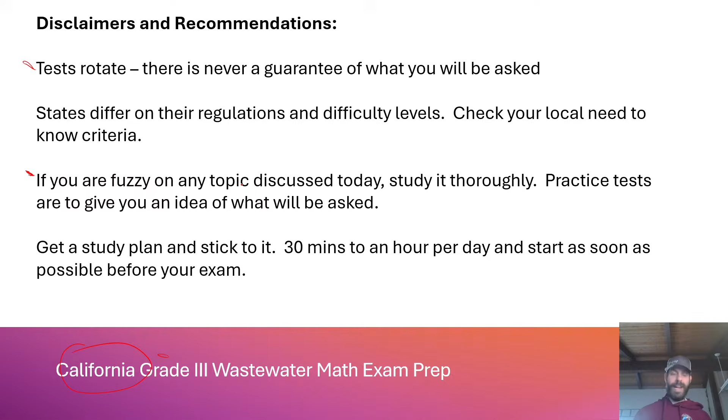So let's get into it. True or false: when operating two basins in series, that means they run parallel to each other. True or false? I'll give you a second. This is false. Series and parallel are opposite. Series means I have a basin here, and then another basin here, this one first, this one second. Very good, Donnie, false, absolutely. And then parallel is, here's my flow. Here's a basin, here's a basin. So this is parallel, okay?

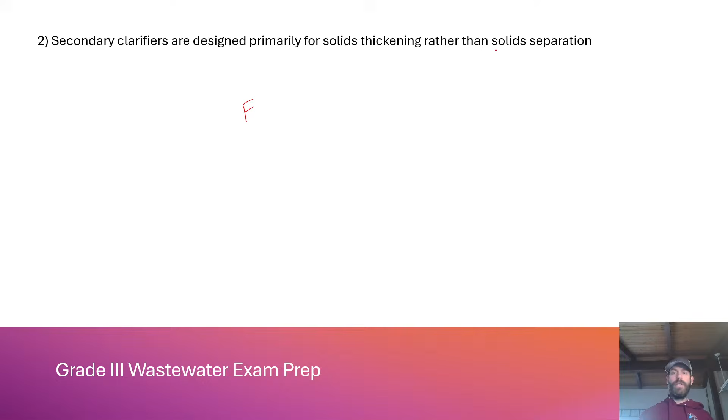Next one. Secondary clarifiers are designed primarily for solids thickening rather than solid separation. True or false? Are secondary clarifiers there to thicken solids, or are they there to get the solids to separate? This is false. They're for solid separation, not thickening. All right, Donnie got that one. By the way, if you were in my grades 1 and 2, I couldn't see the chat box because of some weird thing that happened with my pen tablet right before I launched the stream. I was able to fix that, so I can actually see you guys chatting in real time.

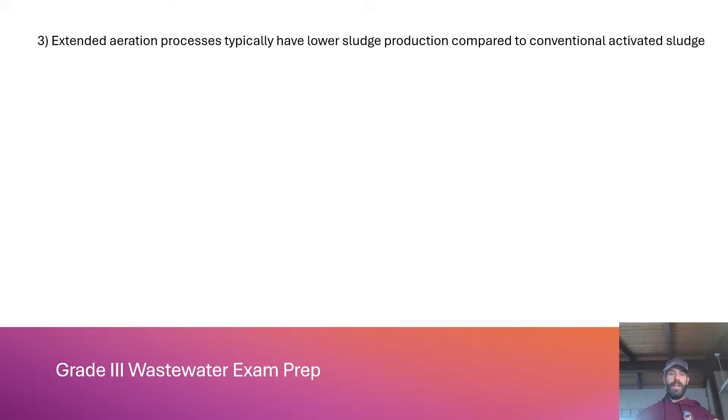This is great. Number 3: extended aeration processes typically have lower sludge production compared to conventional activated sludge. Do extended aeration processes produce more sludge or lower sludge than conventional activated sludge? This would be true. It's way more stable. You should look at the different phases of activated sludge and microbial growth. It's just stable, they're just not multiplying as much. And actually in extended aeration, they're kind of cannibalizing each other a little bit.

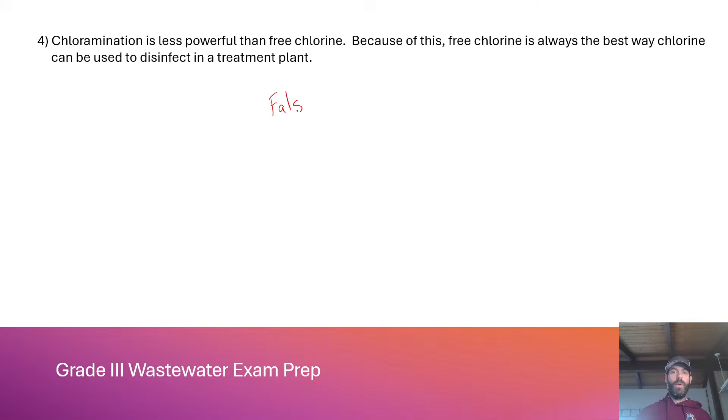Number 4: chloramination is less powerful than free chlorine. Because of this, free chlorine is always the best way chlorine can be used to disinfect in a treatment plant. True or false? This is false. Watch out for these 'always' words, the always-never trap. I'm always suspect of something when I see the word always or never. Chloramination has its place, even though it may not be nuking the bacteria. There's disinfection byproducts you have to think about with free chlorine. With chloramination, you don't have to worry about those as much. And the other thing chloramines do is hold their residual longer than free chlorine. So if it's a hot, windy day and you've got a lot of detention time in your contact chamber, chloramines are actually pretty useful.

Number 5: detecting fecal coliform confirms pathogens are present. When you do a test and detect fecal coliform, does that confirm the pathogens are present? True or false? This is false.

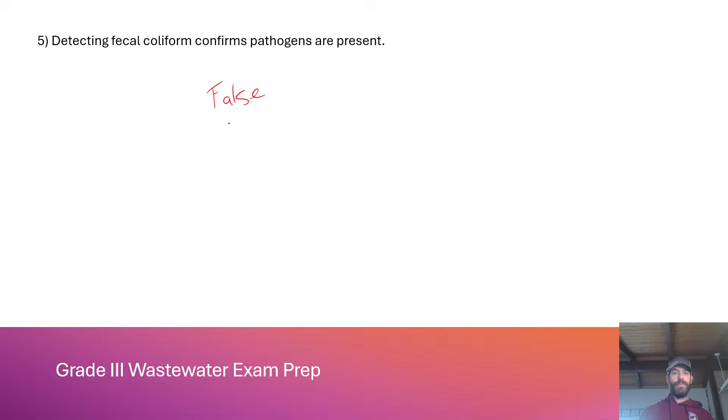Fecal coliform is still an indicator organism. It has not confirmed anything. It's just confirmed that there's fecal contamination, not that pathogens are present. This is a tricky one. I actually wrung my hands about this one when I ran into it on one of my tests, and I went and looked it up afterwards. It really hung me up when I ran into this question because I was like, oh wait a second. So no, it's still an indicator.

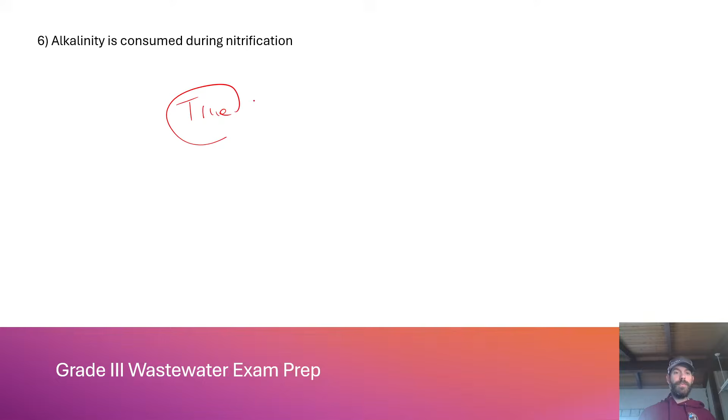Number 6, alkalinity is consumed during nitrification. True. Yep, absolutely. There's a few different things going on there, but just know that alkalinity is consumed. Alkalinity is put back in during denitrification at half the rate, half the rate that it's consumed during nitrification.

Number 7, it's a number that escapes me. I want to say it's 7.14 for some reason, but I don't think that's right. I would have to reference that. It's like 7 point something pounds per pound of ammonia converted, and then it's half of it. It's like 3 point something pounds of alkalinity is returned when you denitrify. So look that one up. That one never sticks with me because it's not something I need to hang on to in my mind for work or anything.

Complete mix and extended aeration activated sludge variations have almost the exact same F to M ratio. This is false.

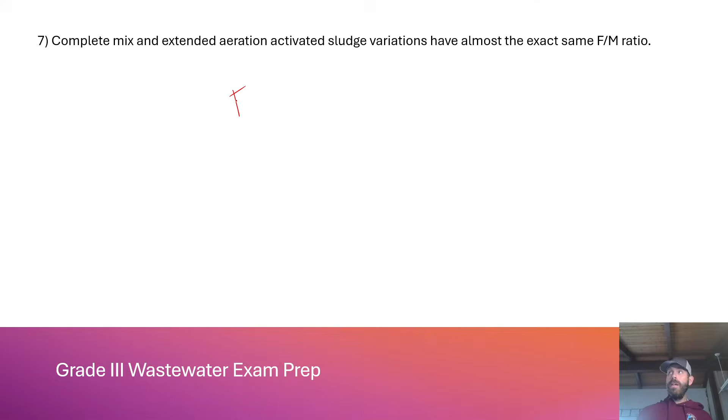Complete mix is going to be a higher F to M ratio. Extended aeration can get really, really low. Complete mix is going to be, you can have a 0.2 to a 0.4, 0.3. I think it can go all the way to a 0.5, which seems really, really high, but extended aeration is going to be really, really low. So this is false.

Number 8, aerobic digester supernatant is very clear, but still requires treatment prior to disinfection. This is true.

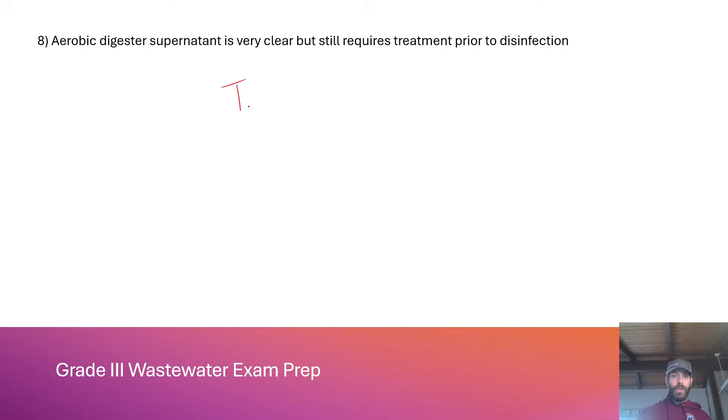It's still loaded with BOD and nitrogen, really. Lots of nitrogen typically in an aerobic digester supernatant. It goes without saying for anaerobic digester supernatant, which is pretty turbid typically. Aerobic digester supernatant, if you're doing it right, comes out pretty clear, but it's still, you got to run it through the process. At my plant, it goes back to the headworks. I've seen other plants where it just goes straight to aeration.

Number 9, disinfection refers to the killing of all microbes in the water. True or false? False.

Disinfection refers to the inactivation or killing of pathogens, not all the microbes. Killing of everything in the water is called sterilization. It's impractical, it's incredibly expensive. Something I experienced on my grade 5 exam, and I actually wrote a little note because they said something about how chlorine was killing all the pathogens.

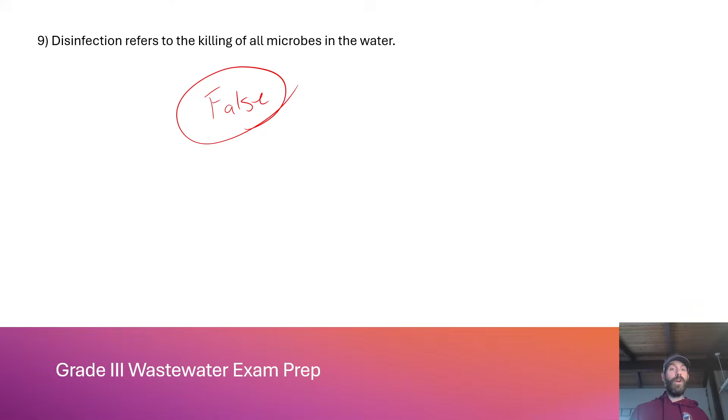That was actually the correct answer because the other answers they had were ridiculous and weren't right. But I wrote them a little note and said, hey, it's technically inactivation of viruses. You kill bacteria with the chlorine, but when you're hitting viruses, they're technically not alive or dead before they inhabit the host. They're interesting creatures before they inhabit the host. What you do is deactivate their ability to reproduce and make you sick. They're still there. So it's a nuance, but I think it's really important to call that out and make sure you understand that disinfection is the killing of some pathogens, but also the inactivation, remember that word, of pathogens.

Number 10, the primary purpose of sludge thickeners is to optimize digester performance. The primary purpose of sludge thickeners is to optimize digester performance. True. You want as thick a sludge as possible going to your digester.

That's why we use thickeners. I'm sure they have some other side reason that you would use a thickener, but your purpose in a thickener is to get as much water out of that sludge before you send it to digestion, okay?

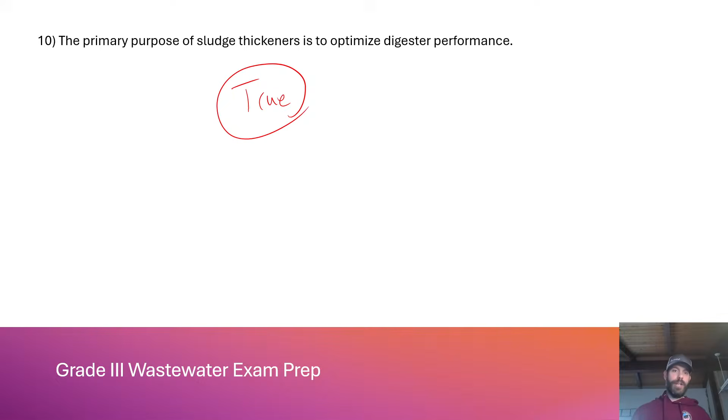Number 11, autotrophic bacteria are responsible for ammonia oxidation. Autotrophic bacteria are responsible for ammonia oxidation.

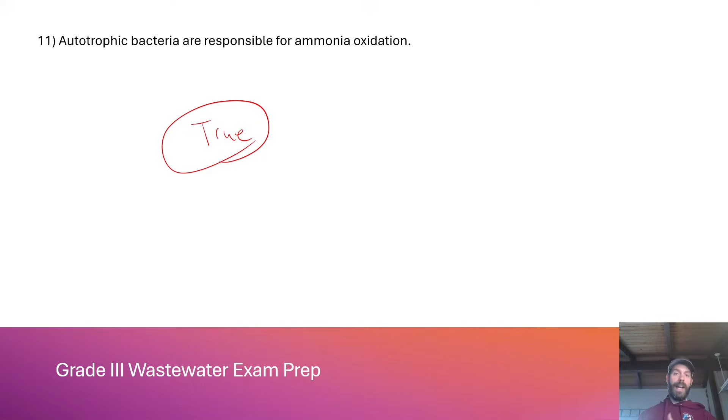This is true. Autotrophs - check out my wastewater whiteboard on nitrification and denitrification, I go into what autotrophs actually are. There's heterotrophs and autotrophs. Autotrophs use inorganic carbon as their food source and inorganic substances like ammonia.

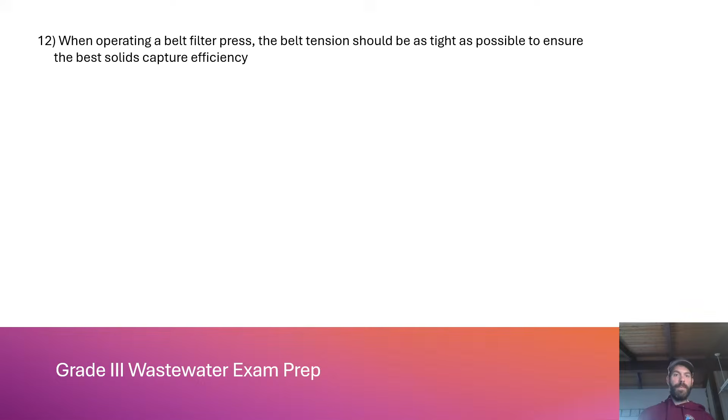Number 12: when operating a belt filter press, the belt tension should be as tight as possible to ensure the best solids capture efficiency. This is false. That's a really good way to blind your belt. You have to have tension, of course, but if it's as tight as possible, the pores stretch and they blind when the water's supposed to pass through.

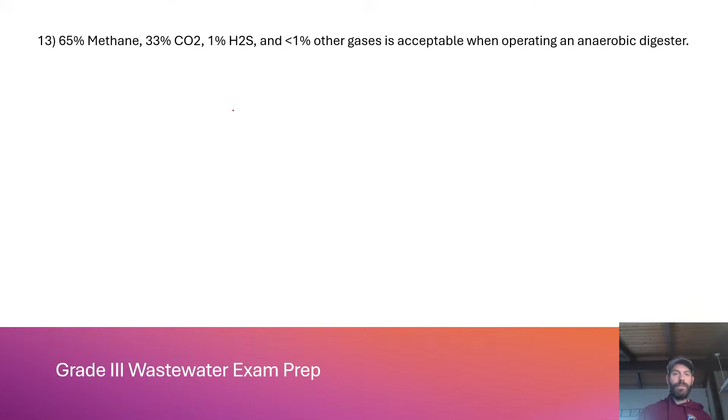13: 65% methane, 33% CO2, 1% H2S, and less than 1% other gases is acceptable when operating an anaerobic digester? This is false. So this is a common trick - the eye is trained for these two, right? 65% methane, that looks pretty good. 33% CO2, that looks pretty good. This is the trick - 1% hydrogen sulfide, no way. It's more like 200 parts per million. 1% is 10,000 parts per million. You're typically going to see less than 1% H2S and other gases. H2S is in there, but it's not 1%. That could cause a lot of problems, corrosivity, among other things. So this is false. Watch out for that.

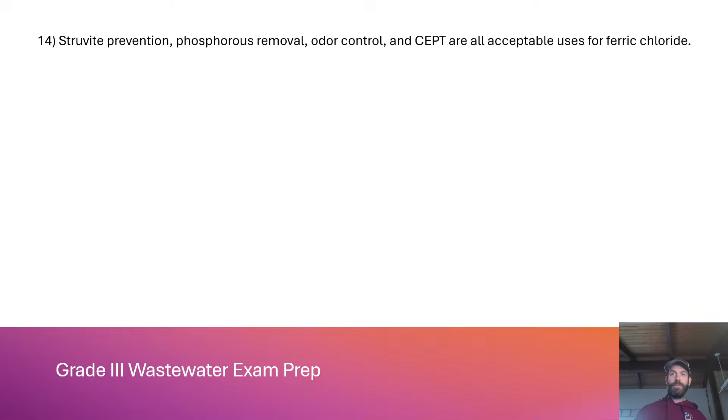Number 14: struvite prevention, phosphorus removal, odor control, and CEPT are all acceptable uses for ferric chloride. This is true. Yep, you should really know all the uses for ferric. I got hammered on - I can't tell you all the things because obviously I can't give away actual test questions that I experienced, and it's been years so it's fuzzy at this point, but I just remember getting a lot of questions about ferric chloride on my grade 3, so just be aware.

Number 15: aluminum sulfate adds alkalinity and raises the pH of the water. This is false. Nope, absolute opposite - it eats up alkalinity and lowers the pH. It's acidic. Pretty common thing to run into at this level is knowing that it lowers the pH.

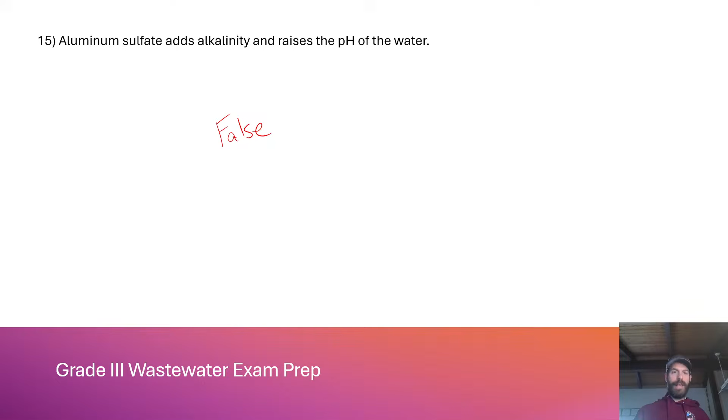Number 16: when nitrifying on a trickling filter, it's important to keep the organic loading at around 20 pounds per day per 1,000 cubic feet. This is false - less than 10 pounds. Okay, you want less food. When you start getting into these nitrification questions, just remember to err on the side of less food. 20 pounds per day per 1,000 cubic feet is more like a standard rate. A nitrifying trickling filter would be less than 10 pounds per day per 1,000 cubic feet. These are the types of trickling filter and pond questions you're going to start getting, not about sloughing and stuff - that's a grade 1 and 2 thing.

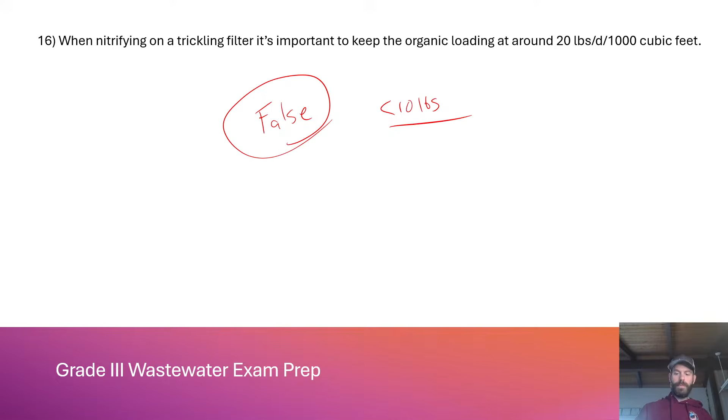Number 17: increasing the MCRT and DO in aeration is a common way to oxidize ammonia. True. You're going to want to get those autotrophs we talked about earlier - they're slow growers. You need to increase your MCRT or SRT if that's what you're using in your plant, or sludge age could be used. You want the higher the better, and you need more DO, more dissolved oxygen, typically around 2 to 4 milligrams per liter. I've seen higher, but 2 is like the floor. I've never seen anybody recommend less than a 2 milligram per liter dissolved oxygen concentration for nitrification.

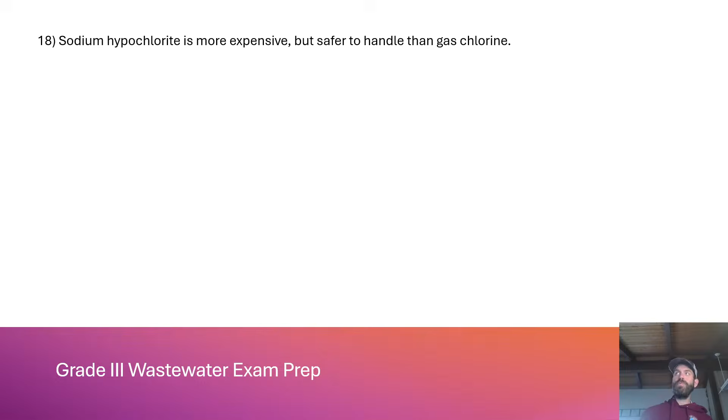Number 18: sodium hypochlorite is more expensive, but safer to handle than gas chlorine. This is true. Instead of shipping gas in big containers, it's liquid - it's 80%, or mostly water. You're just shipping water around. However, you don't have all the dangers of gas chlorine.

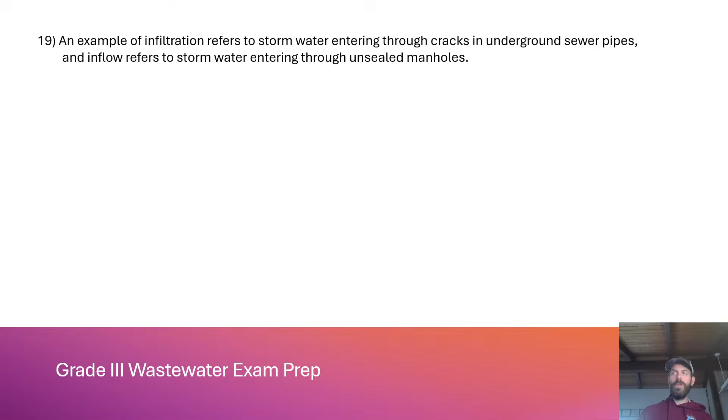An example of infiltration refers to stormwater entering through cracks in underground sewer pipes, and inflow refers to stormwater entering through unsealed manholes. True or false? True. Make sure you know the ins and outs of I&I. I haven't studied a ton of I&I, I don't have to deal with it. I&I is a pretty simple concept, but they can come up with some tricky questions about it. It's kind of surprising when you're taking your test - it's like, geez, where do they come up with this? It's typically nothing I have to really worry about, but just understand I&I and what it does to a plant.

When performing a permit required confined space entry, the 3 roles that need to be filled are the entrant, attendant, and entry supervisor. True or false?

This is true. Those are the 3 roles.

Had a fun little debate over text message this morning, and if any of you are on LinkedIn with me, you might have seen me comment on somebody's thing. So here's the deal, 3 roles that need to be filled.

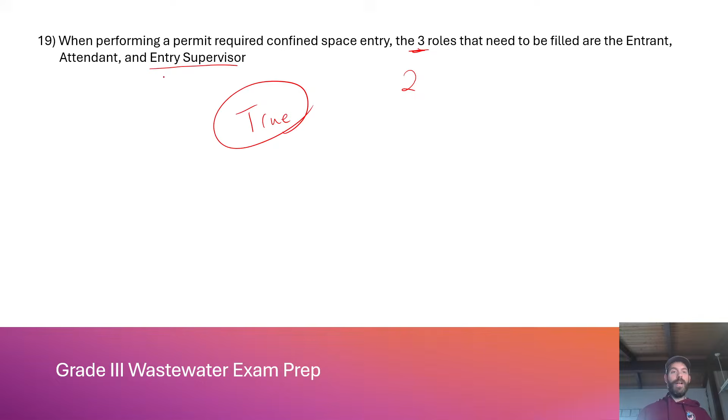If you get a question on your exam that says what's the minimum number of people required, is it 3? It's 2. And here's why: the entry supervisor can also be the attendant, and can also be the entrant. So really the minimum, if they say minimum number of people, even though I know there's 3 roles to be filled, I would say 2 because that is OSHA regulations. That's what OSHA says. Best practices, 3 or more, because you can get into some sketchy stuff with confined space, permit required confined spaces, but this is the bare minimum amount of people, since the entry supervisor can also be the attendant or the entrant at the same time.

Just something to be aware of. So that's a true false. Not too bad, pretty easy.

Now we're gonna jump into the multiple choice, which is gonna ratchet up the difficulty here. Remember with true false, if you don't know it, you have a 50-50 shot. Multiple choice, it's a little bit more, they're gonna screw with your head a little bit more on this one. So I've tried my best to build it in that way, but not lose everybody while I'm doing this. So let's get into the multiple choice.

And if you have any questions, I can see the chat. Donnie seems to be going right on along with me, which I appreciate. If you wanna throw your answers in there, be my guest.

What is nitrification? A, the biological reduction of ammonia to nitrite to nitrate. B, the biological oxidation of ammonia to nitrite to nitrate. C, the biological oxidation of ammonia to nitrate to nitrite. Or D, the biological reduction of ammonia to nitrate to nitrite. Which one of those?

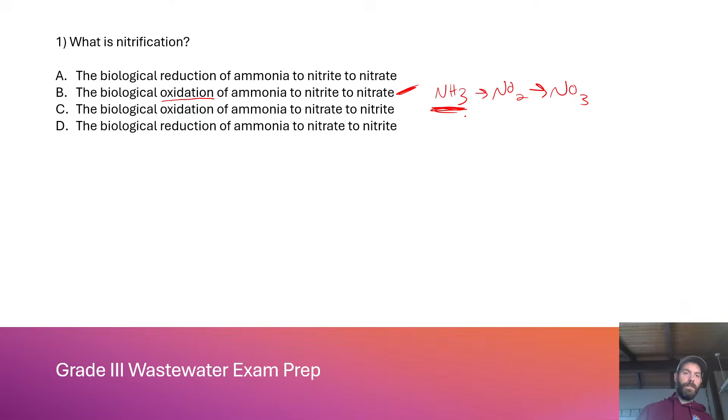Which condition is most likely to cause brown stable foam in an activated sludge system? A, low MLSS. B, filamentous bacteria such as nocardia. C, excessive RAS pumping. D, high DO levels. Which condition is most likely to cause brown stable foam in an activated sludge system?

The answer is B. There you go, nice to see you. B, filamentous bacteria, which, spoiler alert, a few people out there know this that I've been texting with. Christian, who's popped off the chat, I'm dealing with this right now in my plant. It reared its head, and I had a foam over yesterday. It was a lot of fun.

So even those of us that have been doing this a long time, especially in a plant like mine that has to run such a high MLSS and a low F to M, these guys will sneak up. We had a temperature swing, I think that had something to do with it. It was a really adventurous afternoon yesterday. We got it under control, but Nocardia is a bear. I think it's Nocardia, we're gonna do some microscopic analysis on it. But anyway, just so you're aware, filamentous bacteria.

Which process is most effective for phosphorus removal? A, a trickling filter. B, chemical precipitation with alum or ferric. C, aerobic digestion. Or D, chlorination. Most effective for phosphorus removal.

I put this in for those who are not in California. I have not ever, grades 1 through 5, gotten a phosphorus question. If I did, it was forgettable, because I don't remember ever getting a phosphorus question. But you should still know it, because you never know when they're going to pull it out on you. But yeah, B, chemical precipitation with alum or ferric chloride, of these options is the most effective for phosphorus removal.

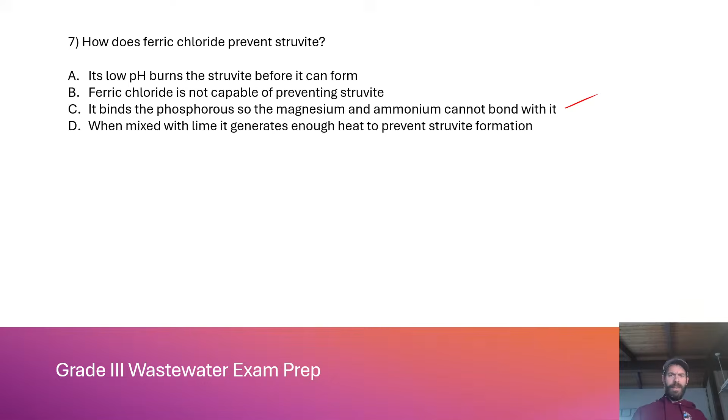So yeah, understand struvite, and understand that struvite, I think it's called phosphorus, magnesium, ammonium, or I forget the actual name of it, but those are the 3 elements you need to create struvite, which is a big problem in anaerobic digesters. Number 8, when operating a wastewater treatment plant with 2 trickling filters, you lose your primary clarifier.

How would you adjust flow to the trickling filters to ensure proper secondary treatment? A, run the filters in parallel. B, increase recirculation. C, decrease recirculation. D, run the filters in series.

So on this one, I've written it a certain way because I'm guiding you to the answer that I believe you would be asked for, because I have run into this question or something like it. It was years and years ago, but yeah, the answer, Donnie, you were absolutely right, is D. Run the filters in series.

You lose your primary clarifier. That's the key. Okay? You have to assume if you have 2 trickling filters, they're already running in parallel. Okay? You've lost your primary. What are you going to do?

You're going to run 1 trickling filter here, and this will be your roughing filter, which acts kind of like a primary clarifier, and then you're going to move to the next one, and this will be your secondary. If it's a standard rate, it's probably now a high rate. So yeah, this is what we're looking for. You're going to want to run the filters in series.

Which of the following organisms are the primary consumers of the organic waste in the wastewater? A, bacteria. B, stalked ciliates. C, rotifers. D, both B and C.

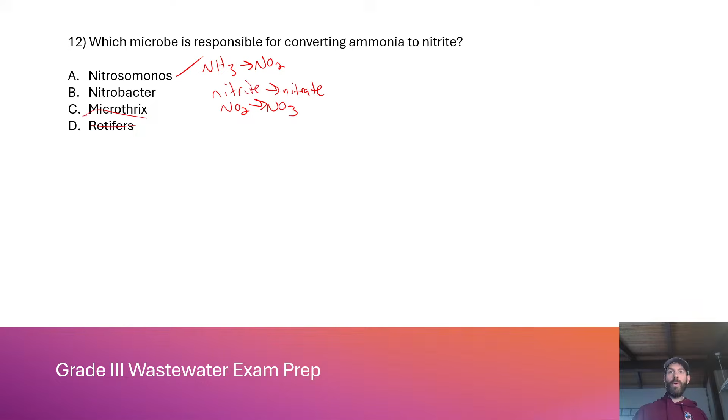I got to go watch your video again. Oh, yeah.

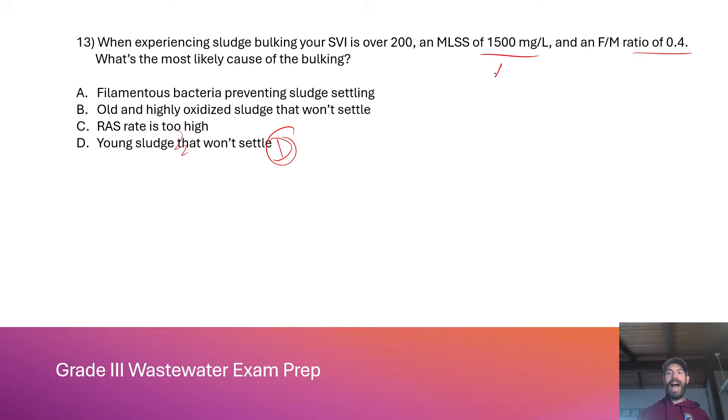This is young sludge. Where'd my pen go? There it is. D, young sludge. B, old and highly oxidized sludge that won't settle, no, not with an MLSS of 1,500 and F to M of 0.4. The older your sludge gets, the higher your MLSS goes and the lower your F to M goes. You could still have an SVI over 200, but typically old and highly oxidized sludge is going to fall like a rock. Filamentous bacteria, probably not in this scenario. Filaments like really low F to Ms, that's not low, and they like high MLSS situations, that's not high. So the best answer is young sludge that won't settle with these factors.

This is why the grade 3 gets tough, because you've got to think about it. I've seen old and highly oxidized sludge that did settle well but left pin floc behind. But that's not the scenario I'm creating here.

14. Why would a secondary clarifier sludge blanket float to the top of aeration? If you see this, what's going on? A, filamentous bacteria preventing sludge settling. B, denitrification in the secondary clarifier. C, too low of a sludge blanket. D, when performing an SVI calculation, your SV30 is 200 milliliters per liter. Which one of those is the best answer for why a secondary clarifier sludge blanket would float?

Donnie, absolutely. B, denitrification in the secondary clarifier. That's just what happens. To fix this, in the short term you'd probably increase your RAS to get it moving faster, but in the long term you probably need to either take a clarifier offline or waste a little bit more, or increase your DO. There's a lot of fixes for it, but DO and aeration could do it too. It's really gonna be plant specific on how you solve this. But yeah, that's what's actually happening: denitrification in the secondary clarifier, gas bubbles float the blanket.

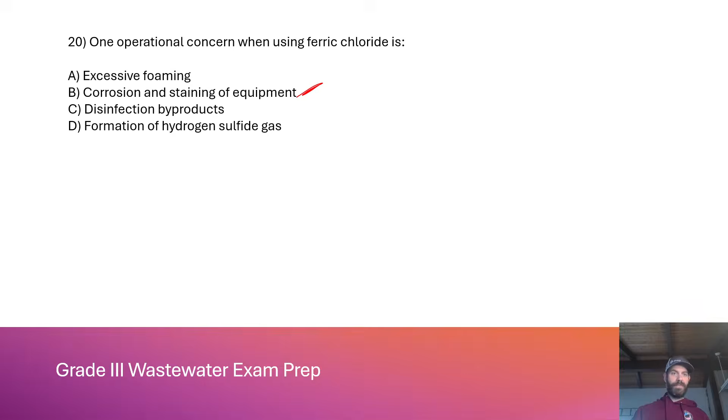21. What is one advantage of using drying beds rather than a belt filter press, BFP? What is one advantage of using drying beds rather than a belt filter press?

Dirt is microbes, okay. Chief Squeezy Poop turns everything orange. Yes, oh my God, dirt is living. I've never done that, Penguins, if that works for you, I've just never heard of that. I actually asked a few other operators, have you ever put dirt in an aeration basin?

Hey man, one thing I'll never do on this channel is tell people how to run their plant. I'll stick to the textbook stuff, but I've got an issue with foaming in my plant right now. Abby sent me material from a company with a synthetic BOD product, and they said it's better than glycerin and dog food. That made me chuckle, because I've seen people throw dog food in aeration to fix an F to M problem. I saw it at Big Bend National Park - the operator there was feast and famine, and he'd dump dog food bags into his complete mix aeration basin. Pretty interesting. Dirt is organic - organic is the O in BOD.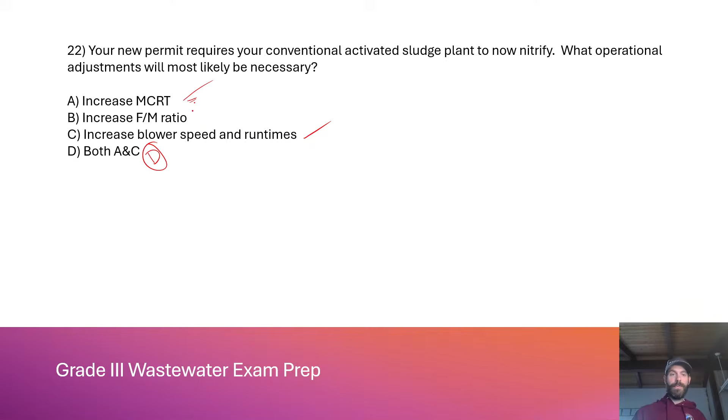The other thing you might get - this is more of a grade 4 and 5 topic, but you might see it on the 3 - is, what's a drawback of having to do this? One of those things is increased power costs because you have to run the blowers more. Also, when you increase your MCRT, you actually have to waste less over a long period of time because the sludge is thicker. You don't have to waste as much to maintain your MLSS in aeration. I'm going to dive deeper into that in my grade 4 and 5 version of this live stream, which I'm thinking will be in January. This took a lot more effort to build than I thought, and the grade 4 and 5 is involved, so I'll get back to you on timing - hoping mid-January, but we'll see.

In which of these locations is an ORP useful? A, anaerobic zone. B, anoxic zone. C, chlorine contact chamber. Or D, all of the above. ORP stands for oxidation reduction potential, and the answer is D, all of the above - you can use these everywhere. They're really cool. I've got one in my anoxic zone, one in my chlorine contact chamber, and I use one after dechlorination. What's cool about an ORP is it will tell you if you're anoxic or anaerobic. The dissolved oxygen sensor can only go so low, and if you hit zero, you could have no dissolved oxygen but still have nitrates in there.

And the ORP is going to tell you where you're at. I go into that on my nitrification, denitrification whiteboard lesson, so go back and read that. I also did a whole whiteboard on oxidation reduction potential, so you should look at that too.

When analyzing MLSS under a microscope, you notice a predominance of rotifers. What does this indicate? A, high sludge age and high MCRT. B, low sludge age and low MCRT. C, high sludge age and low MCRT. Or D, low sludge age and high MCRT. Which one would you expect if you saw a predominance of rotifers? Donnie says A, absolutely.

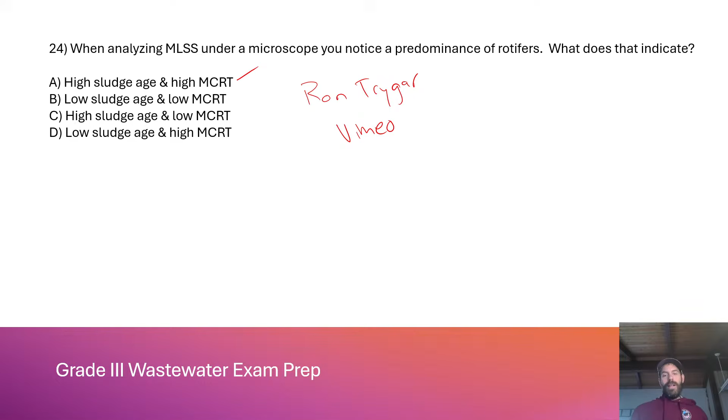If you want the gold standard of activated sludge process control when it comes to wasting and returning and all that stuff, look up this guy named Ron Trygar. I'm not even going to try to replicate what he did. He's been doing this for a long time. His videos are on Vimeo, not on YouTube. He's got like an hour and a half lecture on what happens when you increase wasting, what happens when you decrease wasting when it comes to F to M ratio, when it comes to MCRT, and these things. Check him out, really good, Ron Trygar. He's out of Gainesville, Florida.

Number 24: brown shaggy growth on an RBC indicates what? A, healthy zoogleal film. B, toxic load is killing the zoogleal film. C, algae is competing with the zoogleal film for food. Or D, organic overload. What does brown shaggy growth on an RBC indicate?

Penguins got it: A, healthy zoogleal film. That's what you want to see. If you see it go dark and slimy, that's the bad day. And if it were C, that would be green, and you definitely don't want algae. A lot of, not all, RBCs are covered because of this, so there's only so much real estate on there.

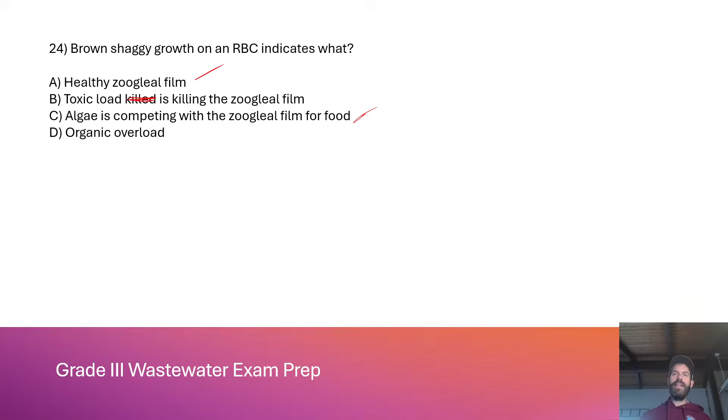White, what is white? Is that a toxic load? Forgot about white. It's like an ashy look. I remember that from something. Yeah, thanks, thank you.

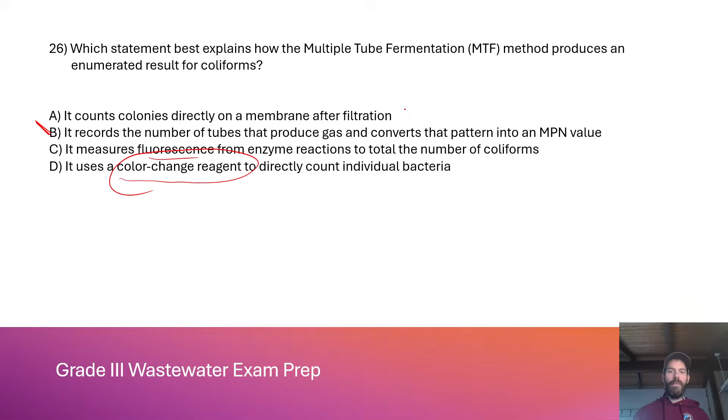That's what I was getting at. And this is the tricky part of these exams - they're going to word it so it seems like you know it because you've seen it before, but no. What we're getting at here is the Colilert or the Quanti-Tray. Be aware of that, and this is where the best answer comes in. The signal there that D was wrong, if you wanted to argue, is they count individual bacteria - no, that's MPN. Multiple tube fermentation is more of a statistical method.

This is like real-time flashcards, this is awesome. Great, I'm glad you're having fun. I'm having fun too, this is great. My boss, I told him I'm taking a long lunch of 2.5 hours to do this - I actually stretched it out. He's coming by the plant a little later and said he might pop in and photobomb my live stream. I said please do. I think everybody would love to see the guy who approved this YouTube channel, because if he hadn't given me approval, I wouldn't be standing here doing this. Anyway, I thought that was kind of funny.

Which statement is not true regarding I&I? A, I&I contributes to lower HRT, which leads to incomplete secondary treatment. B, heavier flows dilute incoming BOD, so there isn't enough food entering the plant. C, during a storm event, a trickling filter may become hydraulically overloaded. D, increased flows cause turbulence in the secondary clarifier, leading to biomass washout.

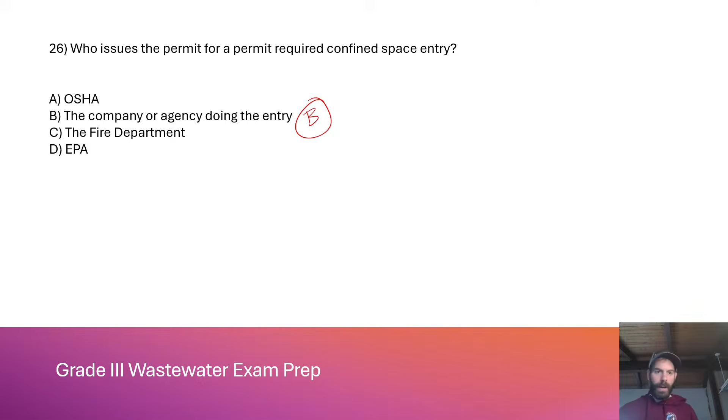Kept on record. Yep, Penguins, you're absolutely right. You file it away, you keep it on record for 1 year. 1 year is the records retention on that. I don't think you'll be asked about that. This is not an OSHA 40 class. I don't think you need to know that level.

So you might see some numbers, like number 3 right here. Don't let that throw you off. That is my corresponding number. This training I have given in person at Tri-State, so what I did corresponds with my actual answer key. That's why you see the number 3 there.

A facility has an aeration tank volume of 1 million gallons. The secondary clarifier is 750,000 gallons. The MLSS concentration is 2,800 milligrams per liter, and the effluent suspended solids is 15 milligrams per liter. The influent flow is 9 million gallons per day, and the target MCRT is 10 days. What is the WAS rate required in GPM to meet this target if the WAS concentration is 7,500 milligrams per liter?

I did a similar version of this on my wasting rate video I did a few weeks ago. If you want to go watch that, I get into wasting a little bit more in detail in that video. But let's just work this out. This is going to be a lightning round.

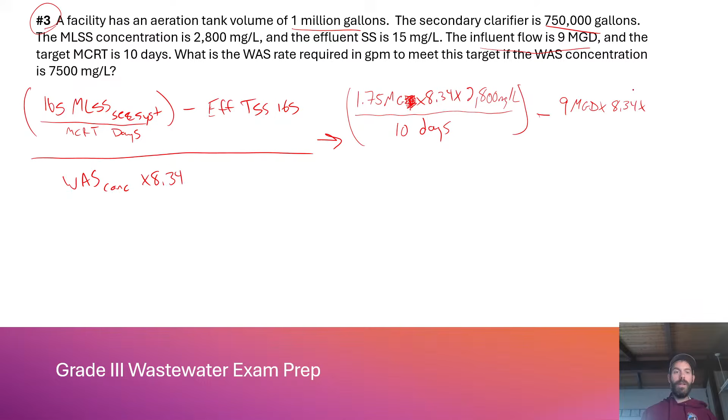Divided by 10 days, MCRT, that's my target MCRT, minus my effluent TSS. Influent flow is 9 MGD. If they don't give you the effluent flow or the plant processes, this is the only one they give you, this is what you use. 9 MGD times 8.34 pounds in a gallon of water times 15 milligrams per liter. Where did I get that one from? Right here, effluent suspended solids. Divided by WAS concentration, 7,500 milligrams per liter, times 8.34 pounds in a gallon.

Okay, bring it down here. If you work that out on your calculator... I've worked these problems out a billion times, but let me just make sure I'm not writing the wrong numbers down. 1.75 times 8.34 times 2,800 equals 40,866, divided by 10, this gives me 4,086.6. Let's just keep the decimal.

4,086.6 pounds per day. Why pounds per day? Pounds are up here, I divide it by 10 days, that gives me pounds per day. And now I can subtract from this number, which is, see, I've got MGD in here. 9 MGD times 8.34 times 15 gives me 1,125.9 pounds per day, so now my units work. Divided by 7,500. I'm going to leave this alone because this is what I like to do here, for those who like the Davidson pie, it's just the easiest way to teach this. If you do your math differently, that's fine, so long as you come up with the correct answer. That's what matters, it doesn't matter that you do it my way.

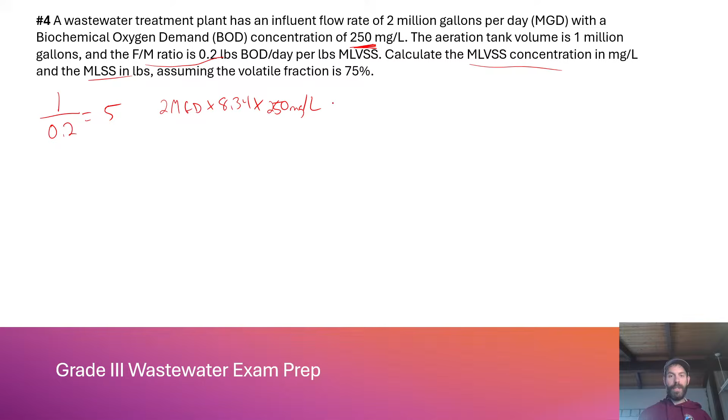I hope that helps. So when you do that math, that gives you 4,170 pounds BOD per day, okay? Now you're going to take 4,170 pounds and multiply it by 5, because we have our pounds. Now we're trying to find out our pounds MLVSS, and that should give you 20,850 pounds MLVSS.

I have seen this part of the problem show up 2 different ways. On my grade 3, I believe what we're doing right now is how you're going to see it. On my grade 4, it was the other way around, I think. I'm remembering correctly, but I have seen it. So on one version, you might have to find the pounds of MLVSS and the concentration of MLSS, or like we're doing it now, the concentration MLVSS and the pounds MLSS. Just pay attention to what they're asking you for.

Okay, so to find the MLVSS concentration, we're going to do a reverse pounds formula. That's 20,850 divided by the aeration tank volume of 1 million gallons, divided by 8.34 pounds in a gallon. So this is just a reverse pounds formula, and that gives you 2,500 milligrams per liter.

MLVSS. Okay, that's my MLVSS concentration. How did I get that? I took pounds and did a reverse pounds formula using the size in MGD, the volume in MGD of aeration, and the weight of a gallon of water.

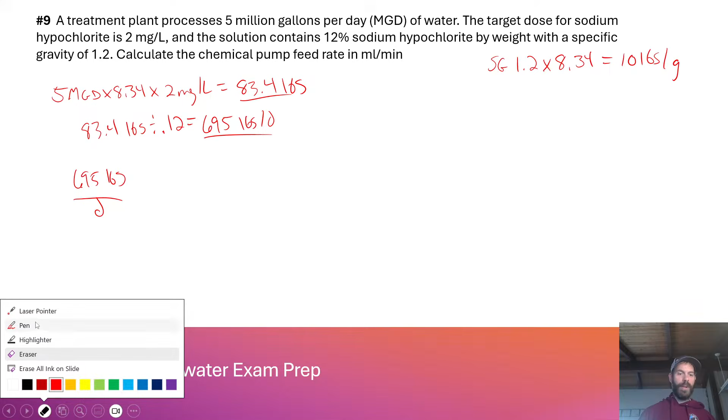Okay, now we're going to convert it to gallons per day. So what I do is take 695 pounds per day, and divide it, or if you want to do the conversion factor method here, let me get my eraser. I should stay consistent on my teaching styles. You should see my scratch paper when I take these exams, it's absolutely horrifying because I change up the way my brain works. I'm like a squirrel seeing something shiny.

So what we're going to do here is take that 10 pounds per gallon, and we're going to put 10 pounds per gallon down here. Pounds cancel out.

That leaves us with gallons per day, doesn't it? Which is 69.5 gallons per day. But they're not asking for gallons per day, they're asking for milliliters per minute. So how do we do that? 69.5 gallons per day

Times, again, using the conversion factor method: one day has 1,440 minutes in a day, so days are going to cancel out. This gives us gallons per minute, but we're not looking for gallons, we're looking for milliliters, so we use 3,785 milliliters per gallon. Gallons cancel out: 69.5 divided by 1,440 times 3,785 should give me about 182.6, give or take. We'll call it 182.6 milliliters per minute.

You probably need multiple feed pumps for this one. That's quite the feed rate for a little pump. But yeah, that's it. That's how you do that math problem.

Pretty simple. If you are given high test hypochlorite, like at 65%, you would stop here. You don't need to convert it to gallons. It's just like 65% HTH - you would do this part right here, and then you would just divide by the concentration, and that gives you your pounds per day.

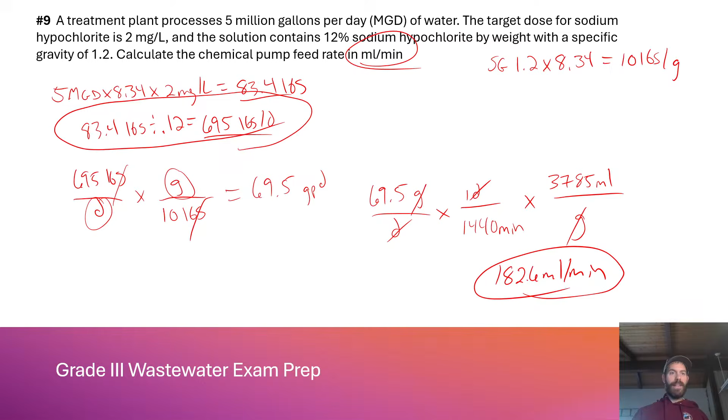Okay, number 10. A wastewater treatment plant processes 40,000 gallons per day of waste-activated sludge to a belt press. The WAS has a TS concentration of 4% as a weight fraction. They're going to throw words like that in - that doesn't really mean anything, but I write that stuff in there to try to make it kind of how they write it.

And a polymer dose target of 3.5 pounds polymer per ton of TS required. The polymer being used has a concentration of 41% and a density of 11.7 pounds per gallon. How many gallons per day are used? So this is probably the most complicated dewatering question I could come up with. I did this because all the different things you need to know about dewatering math are enveloped in this. So if you can get this down, I think you can get most of the questions they're going to ask you about dewatering math down. So let's start with this: how many gallons per day are used?

And this is actually a polymer question, but you got to kind of go into - oh wait, this isn't dewatering math, this is a dosing question. I'm sorry, this is a dosing calculation. Oh, never mind, I went right to belt press math.

Okay, so let's do 0.04 mgd. Where did I get that? See, that's the danger in doing live. I gotta show you guys that I am human and I make mistakes.

Times 40,000 milligrams per liter. Let me explain what I'm doing right here. The wastewater treatment plant processes 40,000 gallons per day of WAS, so 0.04 mgd is going to the belt press. 8.34 pounds in a gallon of water and 40,000 milligrams per liter - the WAS total solids concentration is 4%, and 1% equals 10,000 milligrams per liter. That's where that's coming from.

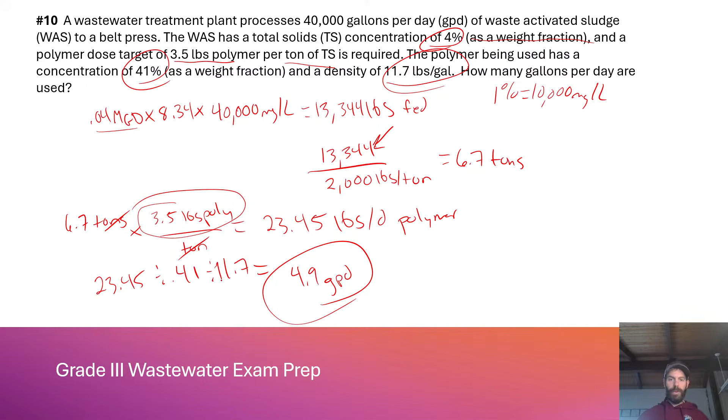That was it. Number 12. I haven't done that math problem in a long time. Even though I teach it, it's been a while, so I had to kind of shake the rust off and actually remember what I was even looking at.

Number 12. The influent flow rate to a DAF system is 250 GPM with a solids concentration of 9,500 milligrams per liter. The system has a surface area of 1,000 square feet. Determine the solids loading rate in pounds per hour per square foot.

So when you have a DAF or a DAFT, it could be either one, dissolved air flotation thickener or dissolved air flotation. It depends on what you're using it for. You're looking for pounds per hour per square foot, not pounds per day, pounds per hour.

So what you're going to do, this is how I like to teach it. I'm going to actually convert this to million gallons per hour. So I'm going to take 250 gallons per minute. I'll show you how these units work. Times...

60 minutes in an hour. What does that give me? 15,000 gallons per hour, or if I divide by a million, 0.015 million gallons per hour. Hey, look at that. You see a pounds formula potential there.

We're not doing a pound, are we doing a pounds formula? We are doing a pounds formula here. Yeah, this is where you're gonna start moving towards more advanced pounds formulas and being a little bit more freestyle with it. You need an mg of flow of some kind to do the pounds formula.

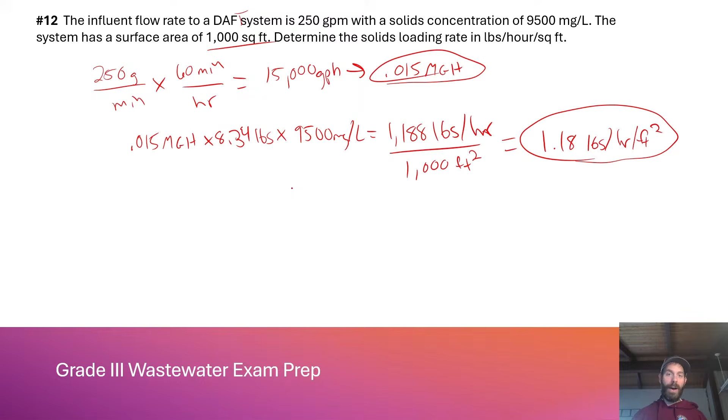Now, when you get into these math problems, it might not be so simple as them just giving you the square feet. They might give you dimensions, so be able to do that, surface area. But be aware, they're gonna give you a depth probably. Don't use the depth. When you're talking about solids loading to a DAF, you're talking about the surface area, okay? Not the volume. Number 15.

Oh boy. A WRRF, or a WRF, operates an anaerobic digester with a daily influent flow of 40,000 gallons per day. And the wastewater has a solids concentration of 3% VSS, volatile suspended solids, and a BOD of 1,000 milligrams per liter.

Yep, that's right, Frank, surface area not volume. The digester's total volume is 30,000 cubic feet. Convert the units and calculate the organic loading rate in pounds of volatile solids per day per cubic foot.

Just like we just did two slides ago, we're doing a pounds formula. Pounds of what, though? So organic loading to a digester is pounds of volatile solids per day, not BOD, even though those are very much correlated, and I'm not getting into that theory today.

Just if you're given volatile solids and you're given BOD, you use the volatile solids. That's how we express loading to a digester.

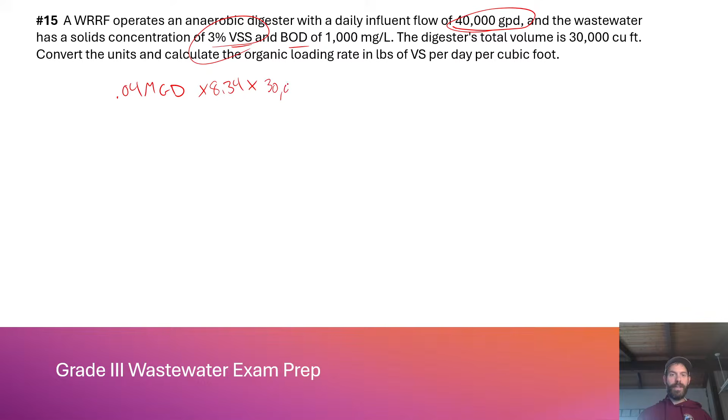So simply 0.04 MGD, where'd that come from? 40,000 gallons per day, MGD times 8.34 pounds in a gallon. Boy, this equation's showing up a lot, isn't it? It's all over the grade 3. Times 30,000 milligrams per liter. Where did I get that from? 3%, 1% is 10,000 milligrams per liter. Okay, that gives me 10,008 pounds per day volatile solids.

And now I take the 30,000 cubic foot, just divide by 30,000, and that gives me 0.33 pounds per day volatile solids per cubic foot.

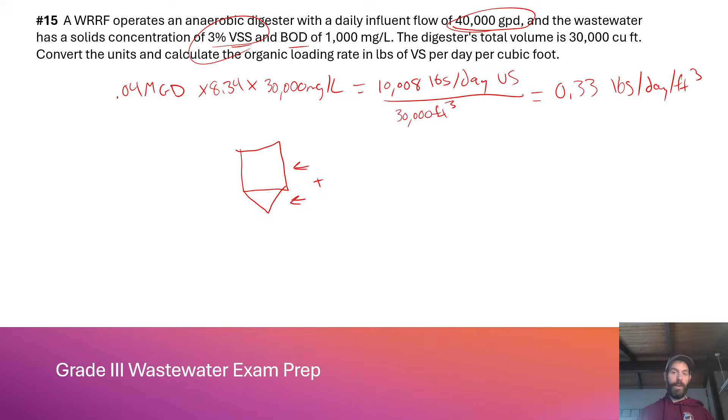Okay, very simple. Where it's going to get difficult here for you is if they give you a truncated digester, because you got to figure out the cubic feet, and then they got a truncated cylinder, and then they got a cone. You would need to figure out the volume in cubic feet for each and then add those together. I've seen it, be ready for it. I did a video on it actually, I actually took it to yet another step and gave you a sloped floor with a gradient. So that's on my channel, you should go check it out if you want to see that.

Number 17, digester gas produced per pound volatile solid destroyed. A wastewater treatment plant feeds 4,000 pounds per day of sludge with a volatile solids percentage of 60% into the digester. The digested sludge has a volatile solids percentage of 40%, and the gas production is 20,000 cubic feet per day. Calculate the cubic feet of digester gas produced per pound of volatile solids destroyed.

All right, first you need to figure out your pounds of volatile solids destroyed. So that equation, volatile solids reduction, is in minus out, divided by in minus in times out, times 100, because this is going to give you a percentage, and then this is times 100 is going to give you the actual percentage. This will be a decimal form in this area, and I'm going to demonstrate that now.

So In is what? 0.6. Volatile solids percentage of 60%, 0.6. Digested sludge has a volatile solids percentage of 40%, so this is out, minus 0.4, divided by 0.6 minus 0.6 times 0.4 times 100. So when you do this, you got to do the parentheses first here, or it's going to screw the whole thing up. So you can do the top first because that comes later.

But you do not just go straight across. Order of operations down here. Do the parentheses first. So what this looks like is 0.2 on the top divided by 0.6 minus 0.24, and that's 0.2 divided by 0.36, which gives you 0.556 times 100, 55.6%. Hopefully that's showing up on the side of the screen there. 55.6% volatile solids reduction. Okay, now we can get to work.

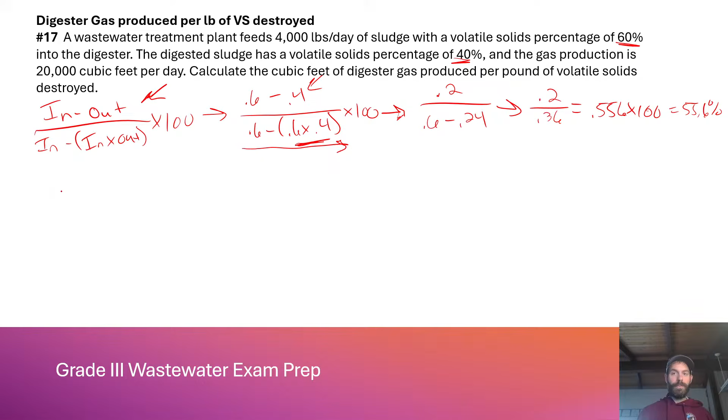Wastewater treatment plant feeds 4,000 pounds per day sludge into the digester, and we calculate the cubic feet of digester gas produced per pound destroyed. So let's just take 4,000 pounds per day, but those are all the solids, times 0.6. These are the volatile solids. These are the things that will be destroyed. It's 2,400 pounds per day volatile solids. Don't just use that number, you gotta calculate your volatile solids.

Now we're gonna take 2,400 pounds volatile solids times what? Times our volatile solids reduction percentage, 0.556. And that should give us 1,334 pounds per day volatile solids destroyed.

Okay, the gas production is 20,000 cubic feet per day. Calculate the cubic feet of digester gas produced per pound destroyed. So we now have our pounds, we have our cubic feet per day. So we're just going to say 20,000 cubic feet of gas divided by 1,334 pounds volatile solids destroyed gives us 15 cubic feet of gas, which is a pretty good number. That's something you can expect from a digester that's functioning well. Pretty good. So yeah, that's how you do that.

This can show up a variety of ways. They could actually ask you to calculate the total cubic feet, and they're going to give you this number, 15 cubic feet. You would just rearrange it. You would instead multiply 15 times 1,334 to get 20,000.

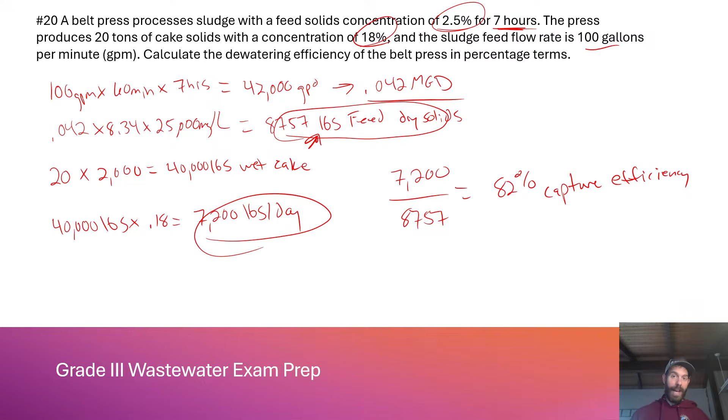Like these other problems I've explained to you, they could throw this at you a few different ways. I've done math problems on my channel in the dewatering space, so go seek those out in the playlist - the advanced and intermediate math playlists. I get into some variations of this. Hopefully that's helpful to you.

Okay, let me just start over again. See, if I wasn't live streaming, I would edit that out.

A belt press processes 150 GPM of sludge for 7.5 hours per day with an influent TS concentration of 2.5% and an effluent TS concentration of 20%. The capture efficiency is 90% — this problem gives us the capture efficiency. And the bulk density of the cake is 75 pounds per cubic foot. How do we know that? They just measure it in a lab, that's how they figure it out. Calculate the total cubic yards of cake produced.

Just like the last problem, we need to start with our MGD. So 150 GPM times 60 minutes in an hour times 7.5 hours per day gives me 67,500 gallons per day, or 0.0675 MGD, is how I did it.

And by the way, when it comes to rounding, I do it a few different ways, and if I'm a little off on the answers, on the exam they give you multiple choice. If you're off by a couple numbers because of your rounding, you got the right answer, assuming you did your math right — I'm making an assumption there. They will put wrong answers in that you might have accidentally gotten by doing something wrong in the math problem, but they're not going to have rounding errors as your answer. I've never seen that, that's a really cruel thing to do. So don't sweat rounding this to 0.0675 — it's not going to move the needle that much. Just a little tip.

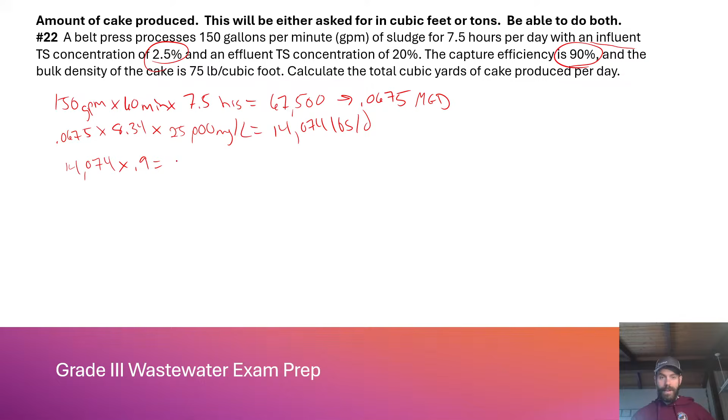And now we have a 90% capture efficiency. This is when they give you the capture efficiency, it makes life really easy, because now I just have to multiply by 0.9, and that's what's coming off the belt press. So 14,074 is being fed, 90% of that is 12,667 pounds per day coming off — that's what's in my cake, okay?

But I need to figure out how much cake is going in. So I'm doing the reverse of what that math problem was that we just did — I'm actually figuring out what's going into my dumpster. You'll typically see this stuff falling into like a roll-off dumpster, okay?

So now, instead of multiplying by my concentration, or my 20% total solids, I'm going to divide by it. So 12,667 pounds per day coming off divided by 0.2 gives me 63,335 pounds of wet cake, okay? Pounds wet cake. Now, I'm going to take 63,335 — let me just come down here.

What do we figure out in the lab? The bulk density of the cake is 75 pounds per cubic foot. So all I do is that conversion factor method, I'm just going to convert units here. 1 cubic foot has 75 pounds of cake in it. Those cancel out, and that gives me — I did this straight across on my answer sheet, so I'm going to break it step by step for you here — 844.46 cubic feet of wet cake.

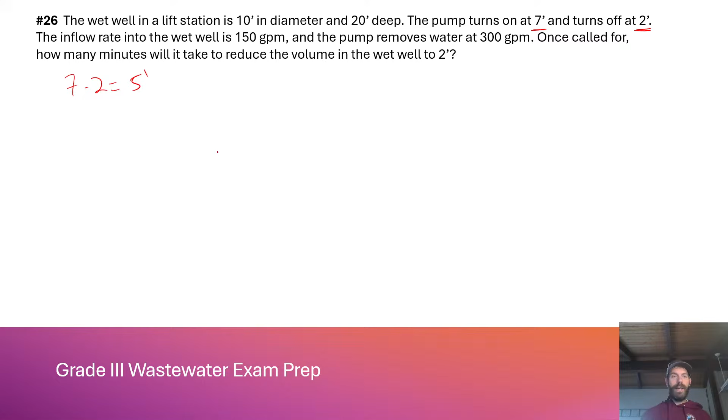So I'm just going to say, what's 7 minus 2? That's pretty easy, 5 feet. Okay, cool. The wet well in a lift station is 10 foot in diameter. The fact that it's 20 foot deep is irrelevant to me in this math problem. What I need to know is what that swing is.

So 0.785 diameter squared is how I do square feet. If you do radius, that's fine, and for pi you just need to divide 10 divided by 2 is 5, and then you can do the pi. But I'm just going to do 10 feet times 10 feet times 5 feet. And what that gives me is 392.5 cubic feet. That is the volume that I'm going to need to pump down.

But I don't pump down in cubic feet per minute, I pump down in gallons per minute. So we got to convert this to gallons, start a new math problem, times 7.48 gallons in a cubic foot. Everybody should know that if you're taking the grade 3. And that gives you 2,936 gallons is what we're going to need to pump down.

Okay, so next part of this. The inflow rate into the wet well is 150 GPM. The pump removes the water at 300 GPM. What does that give me? 300 minus 150 is what? It's 150. That is my net removal from this lift station.

Okay, 150 GPM. Well, now what do you do? You simply take 2,936 gallons divided by 150 gallons per minute. Gallons will cancel out, and then that's 19.57 minutes to pump this down.

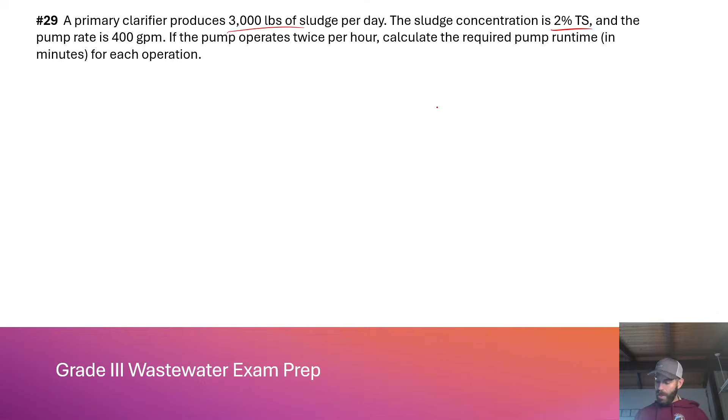3,000 pounds per day divided by 8.34 pounds in a gallon of water, divided by 20,000 milligrams per liter. 1% is 10,000 milligrams per liter. I think I've said that a lot, but as you get into this level of math, you've got to remember that because it's important if you're going to use the pounds formula.

That gives me 0.018 MGD, or 18,000 gallons per day. Okay, so now 18,000 gallons per day, I'm going to do it like the conversion factor method so you can see my logic here.

One day has 24 hours in it, shouldn't be a big surprise. And that gives me 750 gallons per hour. Why did I go there and not gallons per minute?

Because if the pump operates twice per hour, calculate the required pump runtime in minutes for each operation. So now we're going to convert with this GPM here, and I'm going to do the conversion factor method so you see the method to my madness and how the units work.

750 gallons per hour times 400 gallons per minute. Watch my conversion factor method video if you don't know what I'm doing here with why gallons go on the bottom so the units can cancel out. What does that leave me with? Minutes per hour, doesn't it? 750 divided by 400, that's 1.875 minutes per hour. We'll just write that whole thing out: 1.875 minutes per hour.

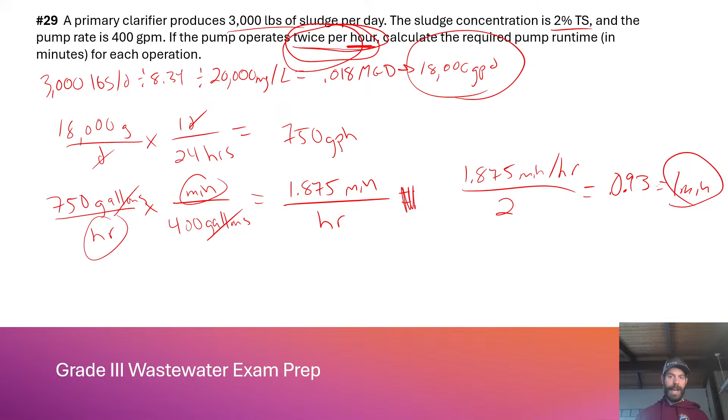So each time I run this pump, it's 1 minute, but I do it twice. I know I'm going over and over on that again, I just wanted to make sure I'm clear as to why 1 minute is the answer and not 1.875 - it's because we ran the pump twice. Okay, next one. And don't worry, BOD's coming guys. Oh, I have to do a 7th inning stretch.

A pump is delivering a flow rate of 450 GPM with a total dynamic head of 120 feet. The input power to the pump, or brake horsepower, is 15 horsepower. Calculate the pump efficiency. I did a whole video on this - I'm not going to get into water, brake, and motor horsepower here, go watch that video. We're just going to solve this math problem real quick.

So how you do this: the equation is GPM, 450 GPM, times TDH, total dynamic head, divided by 3,960. Again, in that video I explain where this number comes from - it has to do with horsepower, I'm not getting into that today, you're just getting exposure to what you might run into on an exam. This gives me 13.6 horsepower.

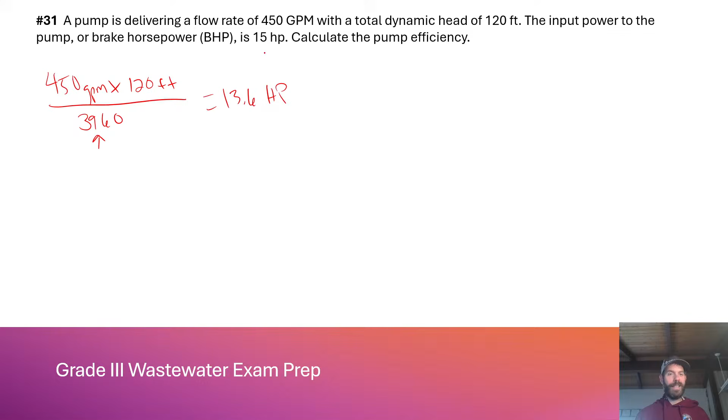This is my water horsepower. My brake horsepower is 15, my water horsepower is 13.6. This is the horsepower actually doing the work, but the brake horsepower is the horsepower that's applied to the shaft of the pump. So what's my efficiency?

Uh-oh, why does it say I'm disconnected? Are you guys there? Put something in the comment box - I'm not here, sorry, if I'm here please put something in the comment box because it just said I'm not here. Just a thumbs up or a wave or something so I know.

Okay cool, thank you, I got a weird thing came across my screen that said I was disconnected. 91%, that's your pump efficiency. Yeah, go watch that video, you're probably going to need it.

A pump operates with a TDH, total dynamic head of 90 feet, and a flow rate of 300 GPM, and the pump is 95% efficient. What's the brake horsepower? So we're going to do this a little differently. What we're going to do is 300 GPM times 90 divided by 3,960. So we're figuring out our water horsepower, but we know our pump efficiency. So this is 6.8 horsepower.

Now all you do is take your water horsepower, 6.8, divided by - where's 95% right here - 0.95, gives me 7.15 horsepower. That's my brake horsepower. Again, if you don't know what I'm talking about, you definitely want to watch that video. What do we got next?

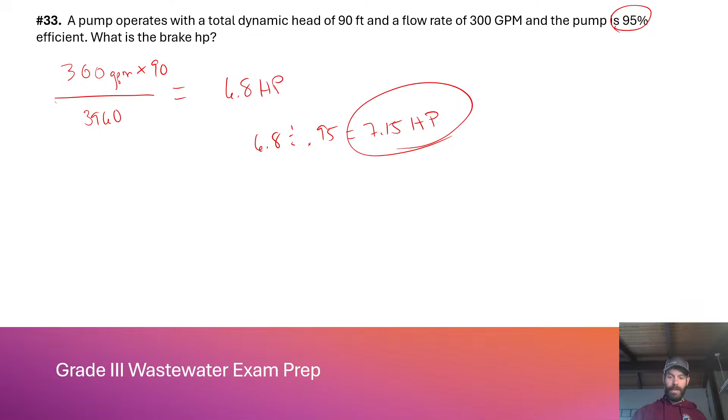34. Well, I'm just going right down the pump stuff, aren't I? A pump operates with a total dynamic head of 100 - oh yeah, this is good, yeah you're going to need to know this one. A pump operates with a total dynamic head of 110 feet and a flow rate of 200 GPM, and the pump is 95% efficient and the motor is 92% efficient. What is the input motor horsepower?

Okay, got to do that equation again. 200 GPM times 110 feet of total dynamic head divided by 3,960, and that gives me a water horsepower of 5.6. But we want our input motor horsepower. So what's our pump efficiency? It's 0.95, isn't it? Divided by 0.95.

But there's one more efficiency to get to our input horsepower. What is that? It's the motor efficiency, divided by 0.92.

And that should give you 6.4. This is what would be on your motor plate, 6.4 horsepower.

I've run into this on the 4 where they only give me one efficiency, and I'm supposed to figure out motor horsepower. In that situation, you only have one efficiency to use. But if they give you 2 efficiencies and you had to figure out your water horsepower, you got to use them both, okay? Or you're going to get it wrong.

Okay. Okay. So on this one,

This is the beginning of a bigger math problem that you're going to run into on your 4 or 5. It's the, I just replaced a pump and it's going to take me how many years to recoup the cost. I'm going to do a video on this later this month when I got a centrifugal blower to swap out. So look out for that one.

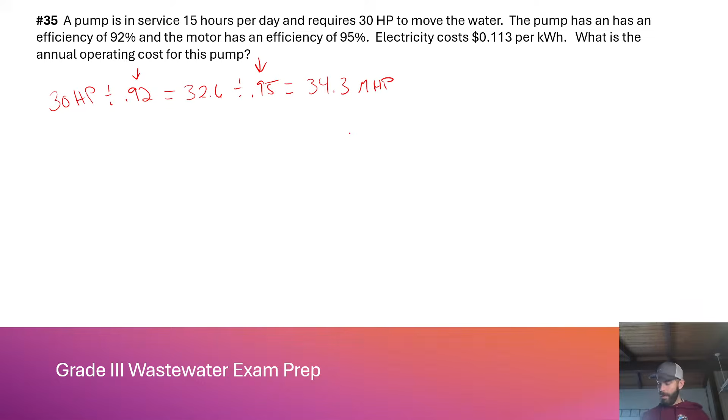32.6 divided by 0.95, sorry guys, I'm out to lunch over here. 32.6 divided by 0.95, my motor horsepower is 34.3, okay. The pump has an efficiency of 92% and the motor has an efficiency of 95%. Maybe I should read my math problems before I start working them out. 34.3 motor horsepower, okay, that's what you're gonna be charged when you're paying an electric bill.

So how does this convert? 34.3 motor horsepower times, where's my factor here? 0.74 kilowatt hours. 0.746 really is it, kilowatt hours per horsepower. So that's 34.3 times 0.746, it's 25.5. We'll say 25.5, just keep it easy.

25.5 kilowatt hours times what? It's really kilowatts, it's not kilowatt hours, that's actually not a true conversion. So it's 0.746 kilowatts per horsepower. 25.5 kilowatts times how long am I running this pump? It's in service 15 hours per day. This is where kilowatt hours come from. I'm sorry that I didn't explain that if you're unaware of how this works. There's a lot of people on message boards that get really worked up. There's no direct kilowatt hours to horsepower conversion. Okay, all right, calm down. So what this would give me is 25.5 times 15 hours is

382.5 kilowatt hours per day, okay? Now, 382.5 kilowatt hours per day times how much? $0.113 per kilowatt hour, so that's 11 cents, 11.3 cents per kilowatt hour. I should probably just do it appropriately with the day down here. Scribble that out. Okay, kilowatt hours cancel out. And then we have 365 days in a year. Days cancel out. So what does that give us?

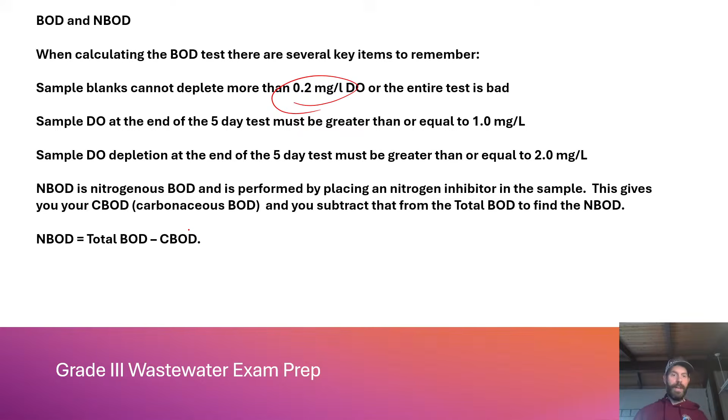I'm going to demonstrate this. Generally, on the exam, you have to find the total BOD first, and then the next math problem you use the answer you got to find the NBOD. If you get the total BOD wrong, guess what? You got the NBOD wrong, and that's a bad day.

Divide the DO depletion of each sample that qualifies by the percentage dilution to get your BOD for that dilution. I will demonstrate this, just bear with me. Average all the concentrations together to get your final BOD. Let's get this party going.

I did a video on this, and I've debated actually pulling the video off the channel because I made a mistake, and I made a correction in the comments. I think people see it, and I think it's okay because people are telling me they're passing their exams in those comments sections. So anyway, we're gonna right that wrong here.

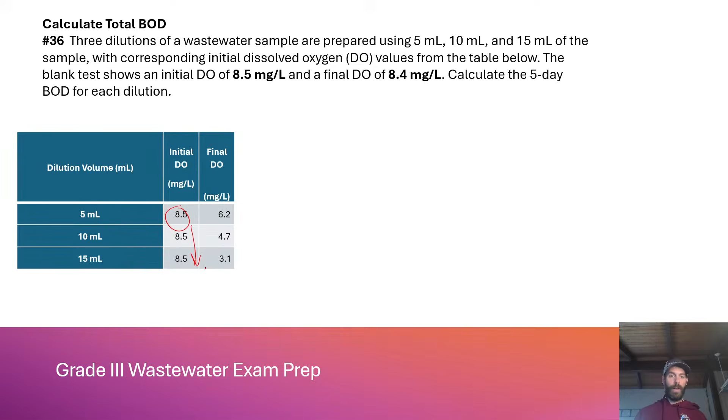All right, so I have 3 dilutions here: a 5, a 10, and a 15 milliliter. They have a corresponding initial DO value on the table below. This is how it will present on your exam. You're going to get a table of data. Your initial DO is 8.5, and that's going to typically be right across the board. The blank test shows an initial DO of 8.5 and a final of 8.4. So remember, I've got to make sure I don't deplete more than 0.2 on my sample blank. I depleted 0.1. We're good.

Calculate the 5-day BOD for each dilution. We're looking for total here. All right, so how you do this, this is how I do it.

I do 3 columns: 5 milliliter, 10 milliliter, and 15 milliliter. By the way, you can have more than 3 dilutions. This is how I've seen it on the exam, they give you 3 dilutions. I've never had to cross out or toss a dilution. They've always been all valid, but that doesn't mean that won't happen to you. If you've experienced on your exam that you've tossed one of these dilutions, throw it in the comments. I'd be curious to hear, because I've not experienced that.

So first thing you're going to do is measure the DO depletion. This is the first thing I do. On my 5 milliliter, it's 8.5 minus 6.2 milligrams per liter dissolved oxygen. Where do I get that? Right here, initial and final. That gives me a DO depletion of 2.3. Does that pass the test? Well, do I have at least 1 milligram per liter dissolved oxygen? Yep, I have 6.2. Did I deplete at least 2? Yes, I depleted 2.3 milligrams per liter. Great, we can continue with this dilution.

Now I'm going to divide 5 by 300 milliliters. That gives me 0.017, which is 1.7%. Oh, Abby's crossed out one. Cool, good, be aware. And Abby's in California, be aware, she's had to cross out one.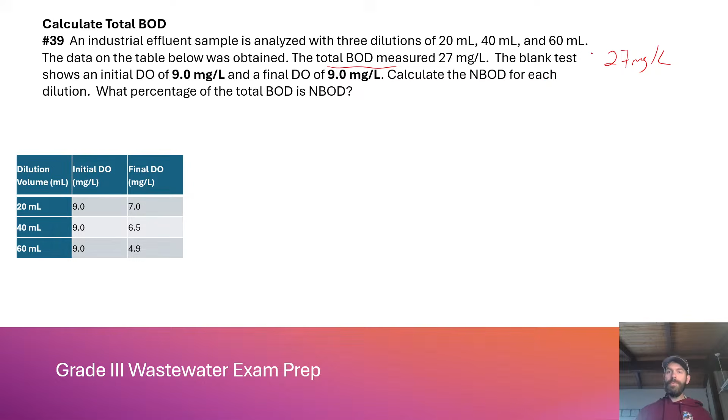Calculate the NBOD for each dilution. What percentage of the total BOD is NBOD? Get ready for that too, guys and gals, they're going to ask you to do that. 9 minus 9, why am I doing that? I'm checking out my DO depletion on my initial, is 0. I had no DO depletion, so that's less than 0.2 depletion. The whole test is valid. Let's proceed. I'm going to do my columns here, 20 milliliters, 40 milliliters, 60 milliliters.

First one, 9 minus 7 is 2. I did this one on purpose. Does this pass the test? It has to be at least 2, and you have to have at least 1 remaining. If this was 1, it would pass, I could use it. If it was 0.9, I couldn't use it. If this was 1.9, I couldn't use it. But since it's a 2 milligram per liter depletion, it is still usable in the test.

Now, what's my concentration? 20 milliliters divided by 300 milliliters. That looks like 0.067, which is a 6.7% dilution. And just like we did earlier, 2 divided by 0.067 is 29.85.

Next, 9 minus 6.5 gives me 2.5. Did we pass the test? Yep, 1 is at least left over. We have at least 1 milligram per liter, and we depleted more than 2. Move on: 40 divided by 300. My percent concentration is 0.133, or 13.3%. Now I just take 2.5 divided by 0.133 equals 18.8 milligrams per liter.

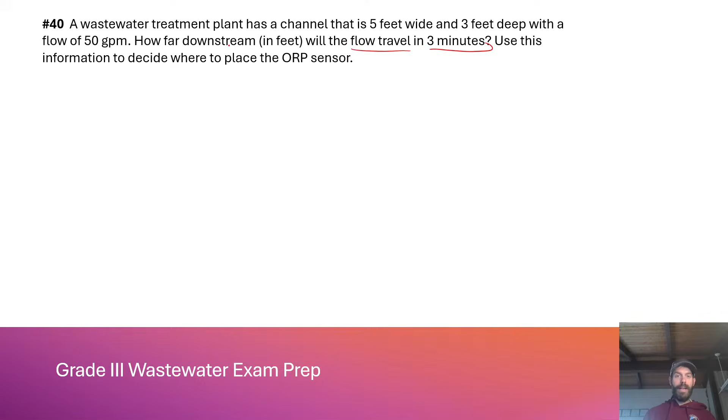So a wastewater treatment plant has a channel 5 feet wide and 3 feet deep with a flow of 50 GPM. What we're going to do is first convert that to square feet. Because what are we asking for? Flow to travel in 3 minutes, how many feet, that's your big key right there. I've got feet here, and I've got GPM, another way to look at that is cubic feet per minute. So there's your signal on what you should be doing here. 5 times 3 is 15, 5 feet times 3 feet is 15 square feet.

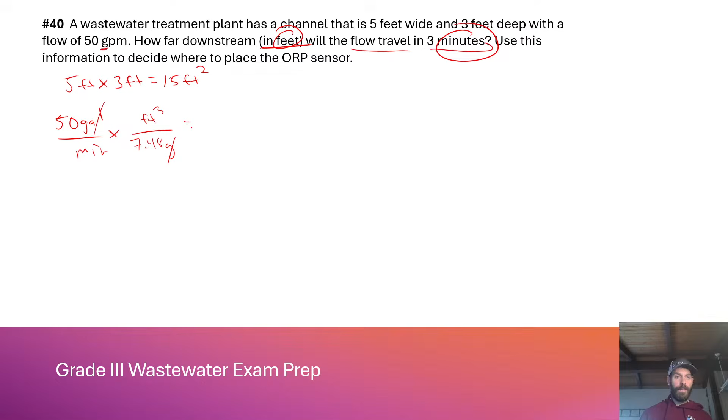50 GPM is really all you're going to do is 50 gallons per minute times 7.48... oops, sorry, wrong side, let me erase that. Divided by 7.48, goes on the bottom, per cubic foot, gallons go away. That should be 6.7 cubic feet per minute. And then all we're going to do is divide by 15 square feet.

Okay, square feet disappear, only 1 foot stays, and that gives me 0.44 feet per minute. How far downstream in feet will the flow travel in 3 minutes is what they're asking, and that's where we're going to place our ORP. So when you multiply that by 3, 0.44 feet per minute times 3 minutes, that should give you 1.32 feet.

Why this is unrealistic - that's just way too close for an ORP to be. What I'm guessing I'm putting in this is a chlorine contact chamber, and that's way too close. You'd probably want it 10 feet away, because you want mixing and things like that. So it's not a very realistic number, but this is just how you do it.

You take your square feet of the cross section of the channel, convert your flow into cubic feet per minute, then divide those two so you have your velocity in feet per minute. Then you just say, okay, how many minutes is it traveling? 3 minutes? Okay, cool, 1.32 feet doesn't seem very far away for what we're trying to do.

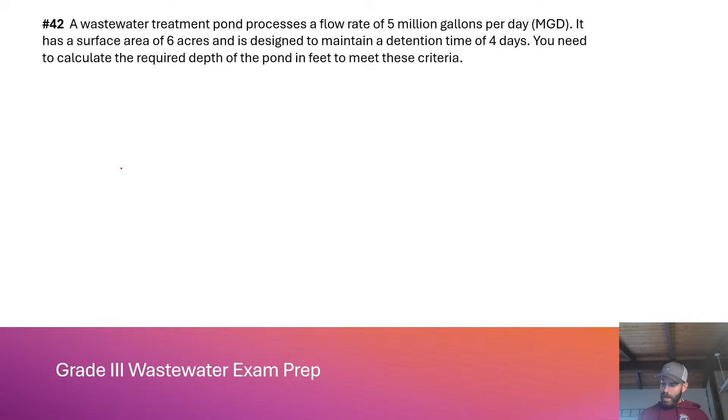So what you're going to do is take the 5 million gallons per day times 3.069 acre-feet per mg - you should commit this to memory, 3.069 acre-feet per million gallons. It's designed to maintain a detention time of 4 days, so times 4 days, and nothing goes down here. If you really want a fraction, put the number 1 right there, times 4 days - I need it on top because I've got to get rid of days over here, divided by 6 acres. This is a very conversion factor method, dimensional analysis way to do this. I don't do a ton of dimensional analysis in my math, but for this one I do, because it's the only way this math problem makes sense to me - watching how these units actually cancel out.

So 5 mgd goes away, mg goes away, mg goes away, acres go away, days go away. What does that leave me with? Feet. This is going to be my depth. 5 times 3.069 times 4 divided by 6 - of course I didn't write the answer down, why would I have done that. 3.069, it's 10 feet something, times 4 divided by 6, 10.2 feet, or 10.23 feet, however you want to do it. This is the depth with these variables - the depth I need to maintain in my pond to have a 4-day detention time. That's it, very simple, but if you're not ready for it and you read that, it's like, ooh.

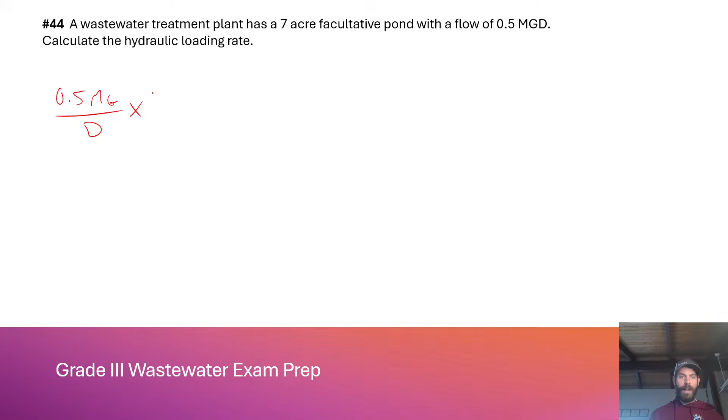Okay, a wastewater treatment plant has a 7-acre facultative pond with a flow of 0.5 mgd. Calculate the hydraulic loading rate in inches per day. Very similar to what we just did. This is a good demonstration of how pond math is just kind of versatile and easy to move around.

3.069 acre feet in a million gallons, times 12 inches per foot, because I need my feet gone, divided by 7 acres. What's left? Inches per day. 0.5 times 3.069 times 12 divided by 7 is 2.6 inches per day.

Be ready for that. They like to pull out these grade 1 and 2 problems because they're expecting you to be really on it.

And Jose says organic loading and hydraulic loading problems for sure on the test. Jose's taken his 3 recently.

So organic loading, I don't think I did one in this. It's pounds BOD per acre, and that messes people up because it's not acre feet, it's per acre. When you do organic loading to a trickling filter or an aeration basin, we use cubic feet, we use volume, not for ponds. You use the surface area in acres. Don't know why they do that, but they do.

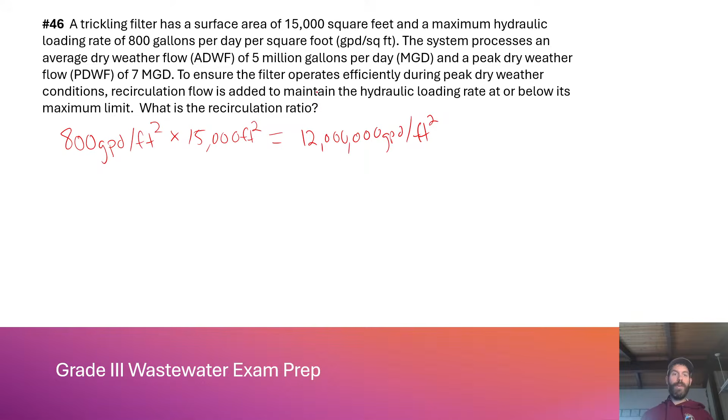Now what we're going to do is we've got the system processes an average dry weather flow of 5 mgd and a peak dry weather flow of 7 mgd. To ensure the filter operates efficiently during peak conditions, recirculation flow is added to maintain the hydraulic loading rate at or below its maximum limit, which is the peak dry weather flow. Don't worry about average dry weather flow, peak is its maximum limit, okay? What is the recirculation ratio?

So we've got to figure out what our recirculation pump should be set at, and all you do is you have 12 million gallons per day per square foot. What's peak dry weather flow? 7 million gallons per day, okay. So that should leave me with 5 million gallons per day.

I don't know why I put square feet in here, it's gallons per day, sheesh. Sorry guys, I wrote that in here for some reason and it's not gallons per day, so I apologize for any confusion. Square feet is gone when you're doing this. It's 12 million gallons per day that's coming over the trickling filter, so for those of you wondering what's going on, where's the square feet, that shouldn't be in there, sorry. Again, if I wasn't doing this live, I would have edited that out. So what you get is 5 million gallons per day is what I'm going to be putting as my recirculation.

You could break this down into GPM if you want, but I'm not asking for that. What I'm asking is what's the recirculation ratio. So you've got 5 million gallons per day against 7 million gallons per day. This is my peak recirculation ratio. 7 million gallons per day is my peak dry weather flow, and 5 million gallons per day is what I'm setting my recirculation pump at. So that's a 0.71 recirculation ratio.

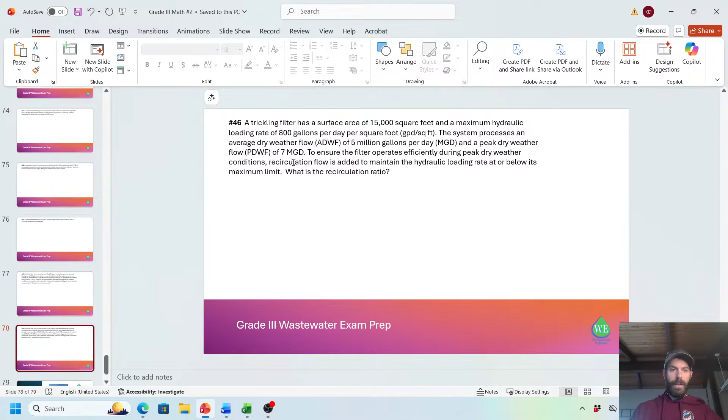You know, it's funny, this could have been written better, so I apologize if that's a little confusing, but yeah, that's what I'm getting at here. I've done a trickling filter problem that's actually better than this. I think I chose this one because it was a little bit shorter, and I've got 10 minutes still on this, so I'm gonna do something here. Hold on, I'm gonna write one out. We're gonna add a slide. Here's what we're gonna do. Bear with me here, we're gonna do another math problem that is gonna maybe work out a little better.

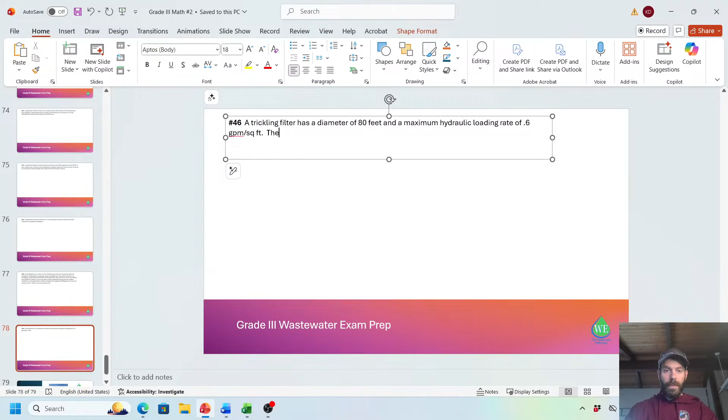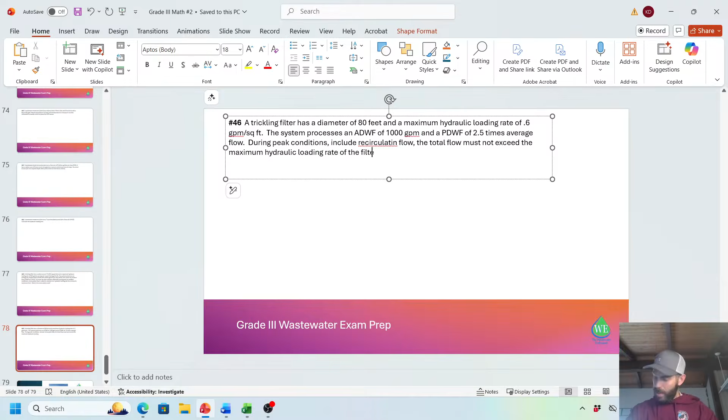A trickling filter has a diameter of 80 feet and a maximum hydraulic loading rate of 0.6 GPM per square foot. The system processes an average dry weather flow of 1,000 GPM and a peak dry weather flow of 2.5 times average flow. During peak conditions, including recirculation flow, the total flow must not exceed the maximum hydraulic loading rate of the filter. Calculate the recirc flow in GPM during peak dry weather flow conditions.

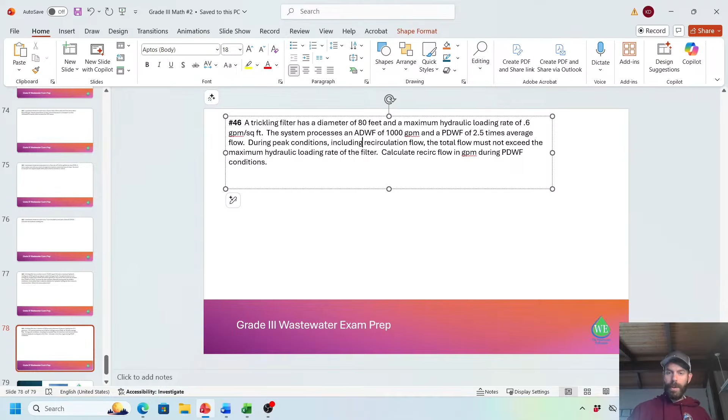Okay, this is going to make a little bit more sense than what I just did. Let me get back into slideshow mode here, let's work this out. A trickling filter has a diameter of 80 feet and a maximum hydraulic loading rate of 0.6 GPM per square feet. The system processes an average dry weather flow of 1,000 GPM and a peak dry weather flow of 2.5 times average flow. During peak conditions, including recirculation flow, the total flow must not exceed the maximum hydraulic loading rate of the filter. Calculate the recirc flow in GPM during peak dry weather flow conditions. This is a way better problem, I should have done this one instead of the other one.

So what we're going to do is take our maximum hydraulic loading rate of 0.6 GPM per square foot. Hydraulic loading rate to a trickling filter is gallons per day per square foot. So we take 0.6 GPM per square foot times 1,440 minutes in a day, and that's going to give me 864 gallons per day per square foot. Now, the trickling filter has a diameter of 80 feet. I'm going to get my square feet over here: 0.785 times diameter squared, 80 feet times 80 feet, equals 5,024 square feet.

Sorry, writing my notes, I can't even read my own handwriting. So anyway, at this point, we just take 864 gallons per day per square foot, multiply it by 5,024 square feet, and that should give us 4,340,736 gallons per day.

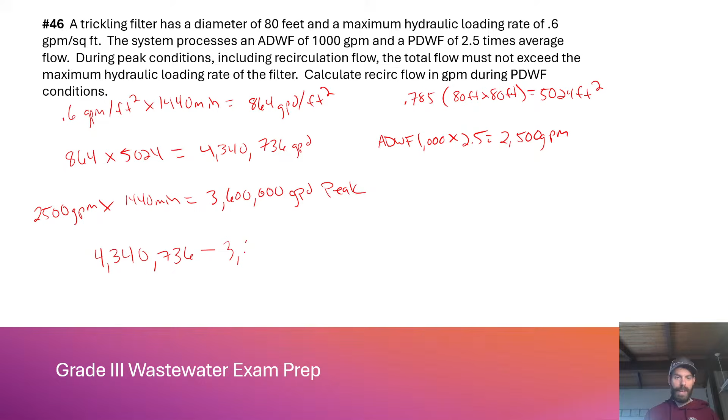736, not 63 — 736 gallons per day subtracted by peak flow, peak influent flow, 3,600,000 gallons per day, gives me 740,736 gallons per day, which is the maximum amount of flow I can have going over the trickling filter during peak flow.

So I don't exceed maximum hydraulic loading rate. But I don't set a pump in gallons per day, I set a pump in gallons per minute. So how you're going to do that is just divide by 1,440 minutes in a day. I've got gallons per day, divided by 1,440 minutes in a day, gives me 514 GPM. If I'm expecting peak dry weather flows coming in, my recirculation pump should be no more than 514 GPM. That's what I just did here.

Okay, I hope that was not confusing. I hope that helped. I think the last trickling filter problem is a little confusing — I made a couple mistakes as I was writing it out, but this actually explains what I was trying to say way better. You should be ready for stuff like this. When you're doing recirculation, when you're doing hydraulic loading, remember to use recirculation rate. When you're using organic loading, do not use the recirculation flow in your equation. I didn't do an organic loading on here — I did one on the grades 1 and 2, but that's what we got.

And I got a comment here. Turnburn says, thank you for the info and help, sir. Absolutely, I'm here to help. I hope it's been helpful. I hope those last couple problems weren't too confusing.

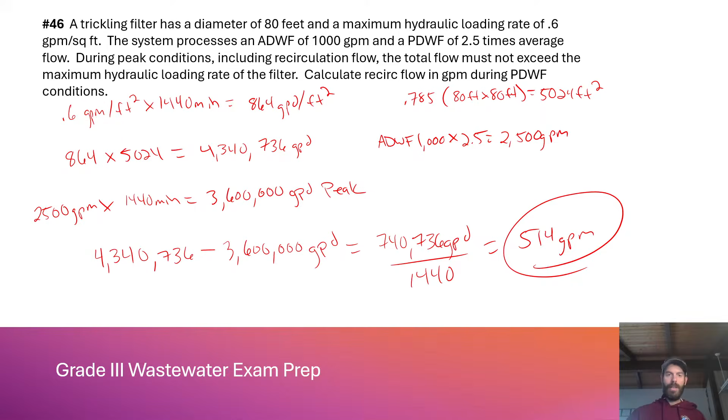I've already mentioned Ron Trygar on Vimeo. Check him out, he's your activated sludge and anaerobic digester guru, I would say — very good stuff. Operator Mindset, Matt over there in Georgia, has a great channel. And then we've got Christian's channel, California Wastewater, all things math for your wastewater tests. It's pretty much strictly math, he's got a couple other things in there, but it's strictly math. And then Operator Mindset's all sorts of stuff — he actually did a really good video yesterday on belt presses. So if you need something on a belt press, you should go watch that because it was really good,

on how they work and the different things that you should know about it. I hope this helped. I don't plan to do another one, but if you guys want me to, I can. We didn't cover everything, it's so hard to cover everything in just one shot. But my hope in this was to get you pointed in the right direction.

Frank says, studying for grade 1 in Arizona, jumped in today. Oh, well Frank, this may be a little bit heavy for you, but I think if you know this stuff, you should be able to crush your one. And Frank, if you go check out my live stream that's posted, I did it about a month ago, it's posted on the channel, it's the grades 1 and 2. The grade 1 in Arizona is similar to the grade 1 in California. So yeah, there's that. I'm trying to think if there's any other resources I can send you to, it's not coming off the top of my head.